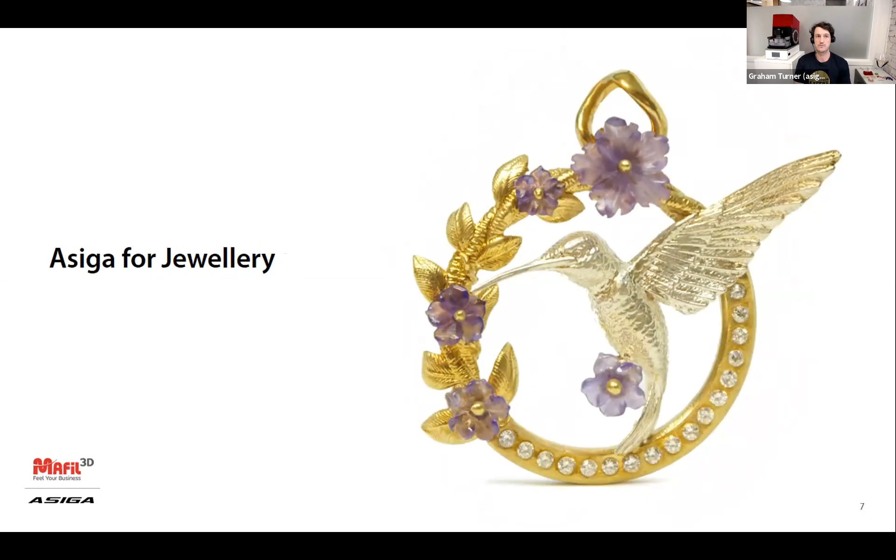So we develop 3D printers primarily for additive manufacturing of end-use components. The industries that we are classified as one of the market leaders in are audiology, where they 3D print hearing aids or audio appliances, jewelry manufacturing - all of our systems are high definition and suitable for manufacturing jewelry - and we offer a superior level of accuracy and precision for dental applications, for restorative, orthodontic and prosthetic dentistry. Also more recently, with our larger Pro 4K system, we've attracted interest from general additive manufacturing industries.

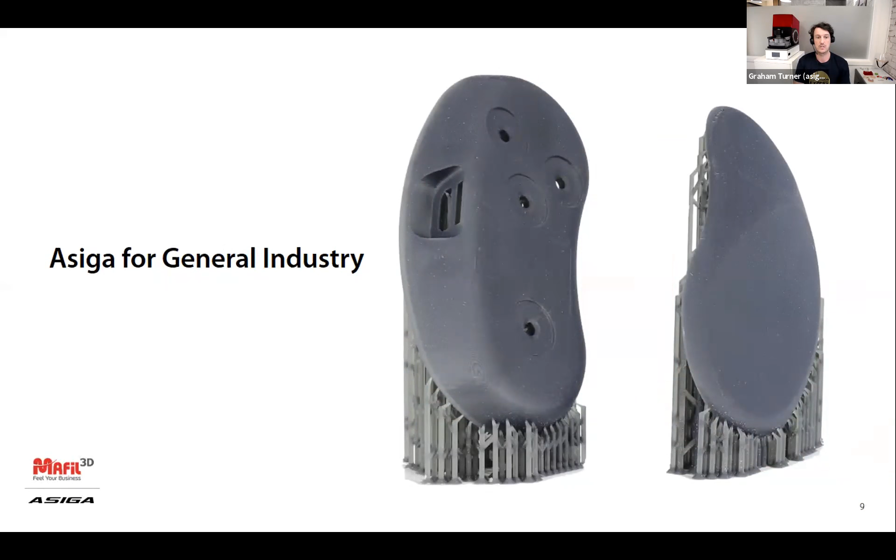And it will do this for every layer. The layer thickness you can print on any Asiga system is arbitrary, so you can choose to print from 1 micron layers through to 200, 300 micron layers, and that all depends on the application. This, for example, is a jewelry manufacturing example, so typically 10 or 25 microns is fairly typical.

Now, the reason we opted for DLP technology back when we began in 2007 was for 3 key reasons. One is that DLP offers a very fast production process, so we're exposing everything in that layer in one exposure.

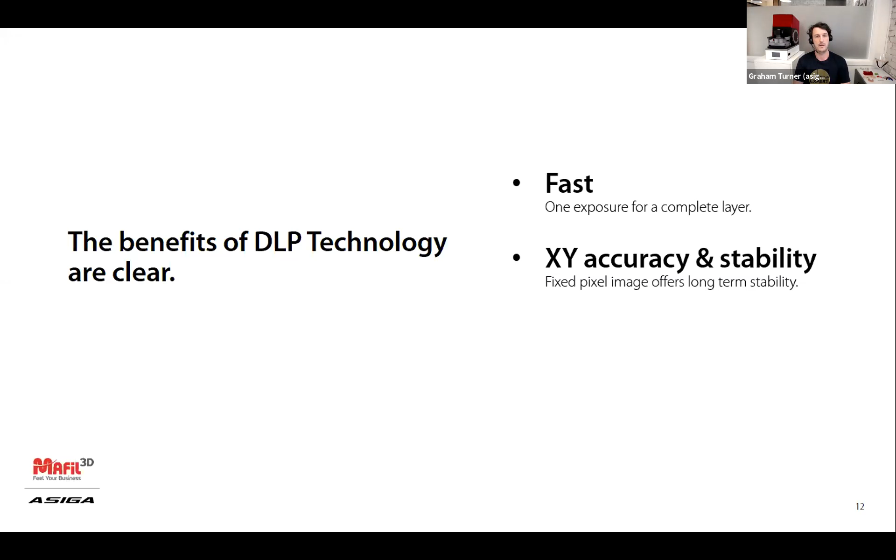Long term, our systems go into direct manufacturing environments specifically, and our largest market is medical manufacturing, for audiology and for dental applications. So long-term stability is critical, and making sure we can achieve that repeatability from print to print is really important. The XY stability on a DLP system is maintained long term. The pixels refer to a mirror on the DLP chip. Those don't move in X and Y, they basically open and close to let light through or block light. So we get good long-term stability on a DLP.

And we've got a wide range of LED options available. By LED options, I'm referring to wavelength of LED. So we have the ability to go into the deeper UV spectrum to process some really innovative new chemistries that are coming out all the time from many different material manufacturers. We find that in the deeper UV spectrum, materials cure much faster. You get a much more accurate, more defined print and much less light overcure.

So the secret to 3D printing accurately is really quite simple. We're producing parts layer upon layer to form an object, so the key really is to form those layers accurately. If you can't form layers accurately, both in X and Y and Z, then you will never be able to produce an accurate component.

I think every 3D printer on the market has the capability of producing an accurate component. There's many different technologies, and those technologies serve a purpose for different types or different applications, different industries. We specialize in the high definition, high accuracy, and precision industries. For us to maintain that accuracy across all of our customers globally, our systems need to perform on a repeatable level. But the key is that those layers are formed accurately. If you can't ensure that those layers throughout an object are formed to the correct size and thickness, you will never achieve a repeatable, accurate output.

So we achieve our accurate layer formation via a number of technologies, which we refer to as process monitoring technologies. The number one technology in this list is our smart positioning system technology, where we not only drive our build platform down to a position, we detect that it's made and reached that position. So we detect for material flow and printer deflection. As we're bringing a build platform down into a liquid resin, a liquid photopolymer that has a viscosity similar, in some instances, to like a yogurt, there's a lot of force required to get that platform down to position, and as a consequence, there's a lot of deflection that occurs on the printer. So our smart positioning system detects that deflection and also detects material flow.

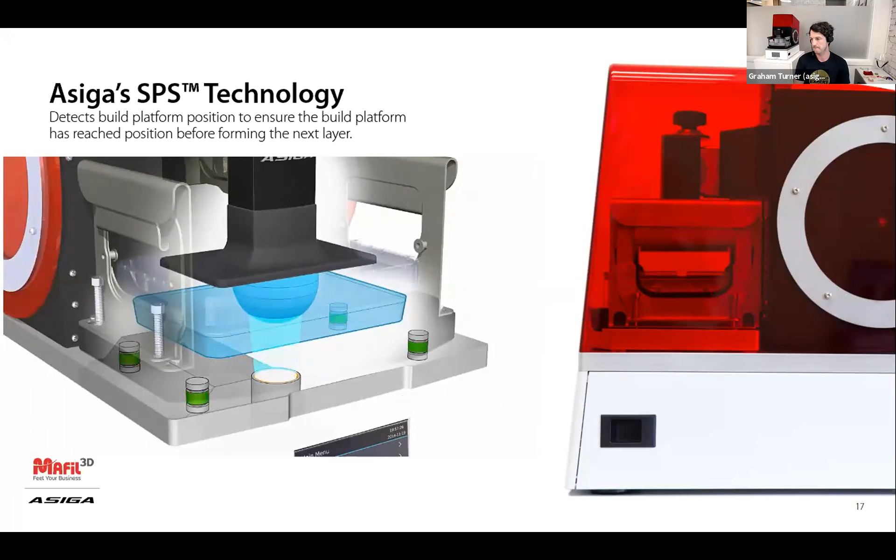So alongside this, build platform positioning is one thing. That's an incredibly important factor in layering.

The second feature we have in all of our systems is an internal radiometer. We're projecting light images onto a light sensitive material, so the intensity of that LED or light source is critical to know how long to cure that material for. We have an internal radiometer actively reading the LED power, and we automatically adjust cure times based on actual LED power. So over time, when that LED reduces in power, we will automatically increase curing time.

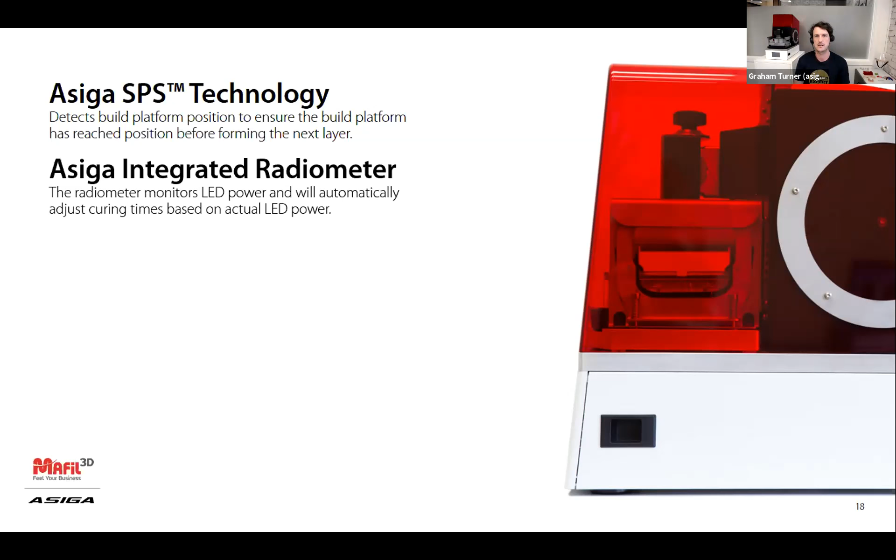Alongside that, we've got a range of LED options. We really focus in the professional, medical market on our deeper UV wavelengths. We've also got the opportunity to produce printers at 405 nanometers. So we've got 365, 385, and 405 nanometers. In the deeper UV, you get much faster curing, so you don't need to cure for as long, which minimizes the light bleed into the material.

Also at that wavelength, we have the ability to produce water clear parts, and they're used widely across the audiology sector and dental sector, where they have certain appliances that need to be water clear and stable.

We use very small pixels, down to 27 microns, on our Max X27 system.

We also accommodate all the unique behaviors of materials when they're being cured. They all behave slightly differently, whether light will bleed through the material at a different rate, whether some shrink more than others, or some materials aren't as strong while they're being printed. So we accommodate all of those material curing factors within our curing profiles.

Ultimately, the printers need to be robust, solid and rigid. Without a rigid construction, the systems will struggle to rebound, so they'll struggle to get back into position after that layer is formed. As they come down to approach, if the printer isn't rigid enough, it will never quite reach position. That's why many systems on the market today have varying results, especially DLP or SLA systems that use an upside down approach like ours.

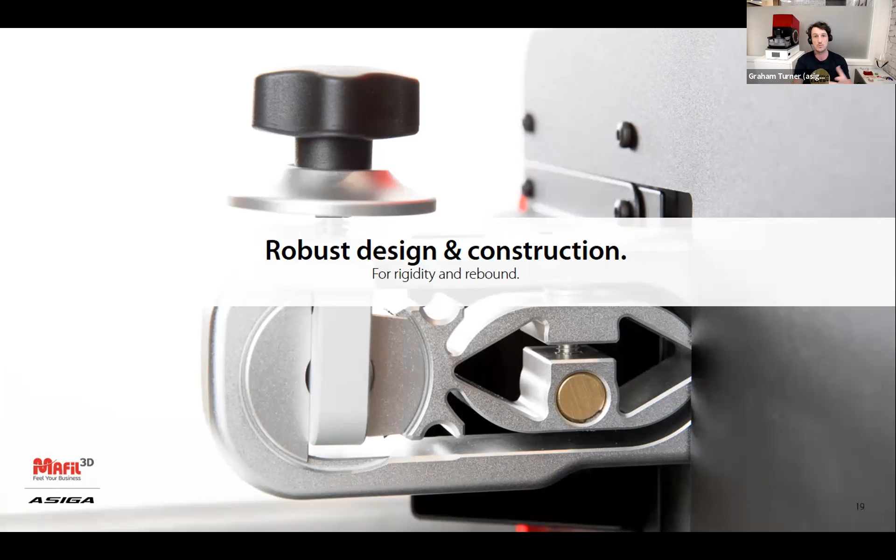We also have a unique mode on our Pro 4K, called 4K mode. This uses a pixel shifting technology, technically called wobulation, where we nudge the DLP chip slightly inside the projector to overlap pixels and achieve much higher definition. So we reduce the native pixel size down significantly.

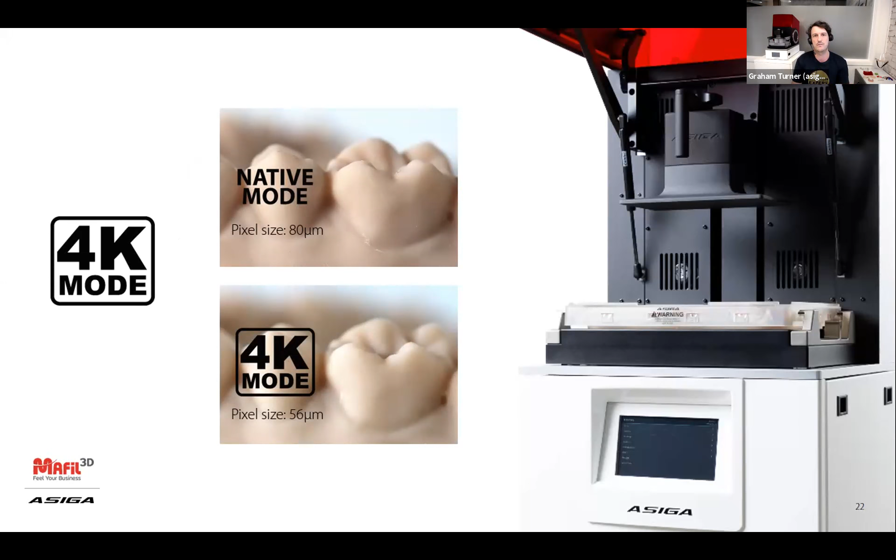On the Pro 4K80, this is an example showing an object printed in its native mode versus 4K mode. The native mode is an 80 micron pixel size, while in 4K mode it's a 56 micron pixel. You can see from the surface finish that the parts are noticeably different, you don't have that digitization on the part surface. So all of our Pro 4K systems are dispatched with 4K mode as standard.

As far as 3D printing goes, I think we're very happy with the engineering on our systems. Asiga, since the beginning, has always had an engineering focus, and we're still very much an engineering company at our core. But we know that materials unlock applications in additive manufacturing.

And we've seen that growth in some industries significantly in such a short period of time. Specifically, if we look at the dental sector, that industry has grown tremendously over the past 3 years, just through the release of new dental materials for many different dental applications.

So the way that we keep our end users up to date is to build optimized curing profiles with all the leading material manufacturers. This is across dentistry, audiology, jewelry manufacturing, and now more of a focus for Asiga is in general additive manufacturing.

And you're lucky to have somebody today from BASF to talk about their materials. It's great to see these big polymer manufacturers really focusing in on additive manufacturing and developing some really quite impressive photopolymers.

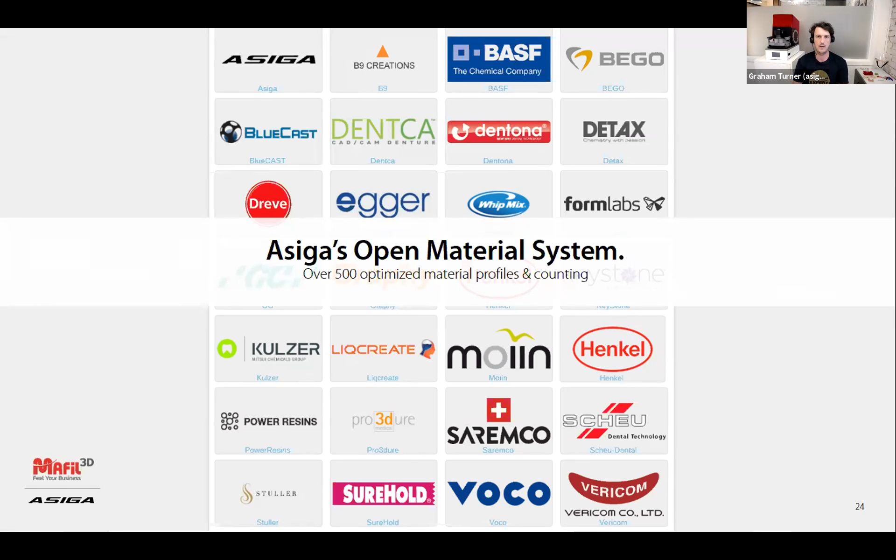And this is a snapshot of our material library, which is growing weekly at the moment. It's staggering to see the interest and development happening across many different industries, specifically around 3D printing polymers.

So I'm going to start with a relationship that we have with Henkel, BASF. I've got some slides after this. With Henkel, the Henkel Loctite brand have developed quite a number of different materials for many different applications. I'm just going to run through some of them with you now. These are compatible with Asiga 3D printers.

So they've got a range of materials from their 3843, which is a high toughness material. They've got a high temperature material which is their 3860 for temperatures up to 220 Celsius. They've got very good elastomeric materials. And I'm going to keep going through these.

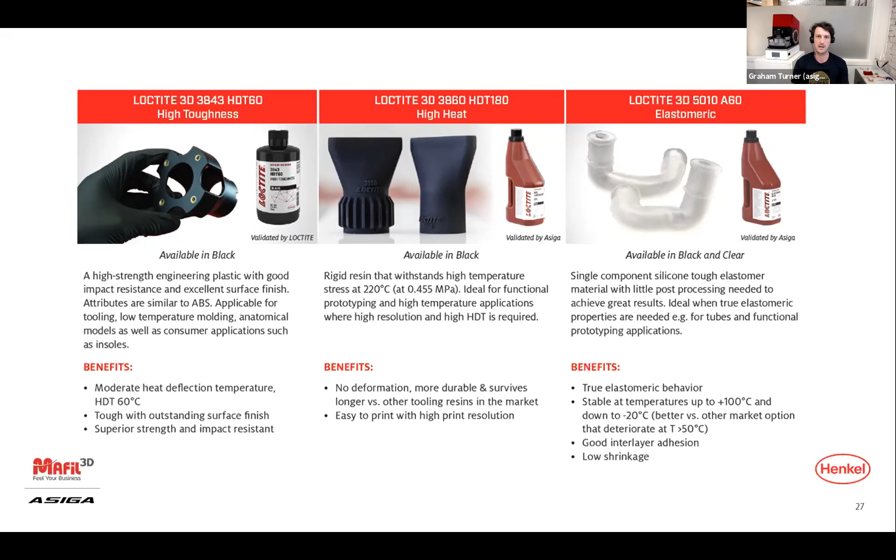These materials, when we started to develop curing profiles, we work directly with Henkel, we work directly with BASF. When we start working with these polymer manufacturers, it's really quite clear that they have a noticeable difference to what we have been familiar with since we began in 2007. There's been a real shift in the mechanical properties available now, especially for our technology, especially for DLP.

Continuing the Henkel range, there's another high impact material in 3172. There's a tough material for dies for injection molding inserts. Asiga also has a material called Fusion Grey, which we've got documented on our website, where we've used that for injection molding inserts. There's another elastomeric material here. And then they've got a general purpose material, a highly accurate material, and an ultra clear material.

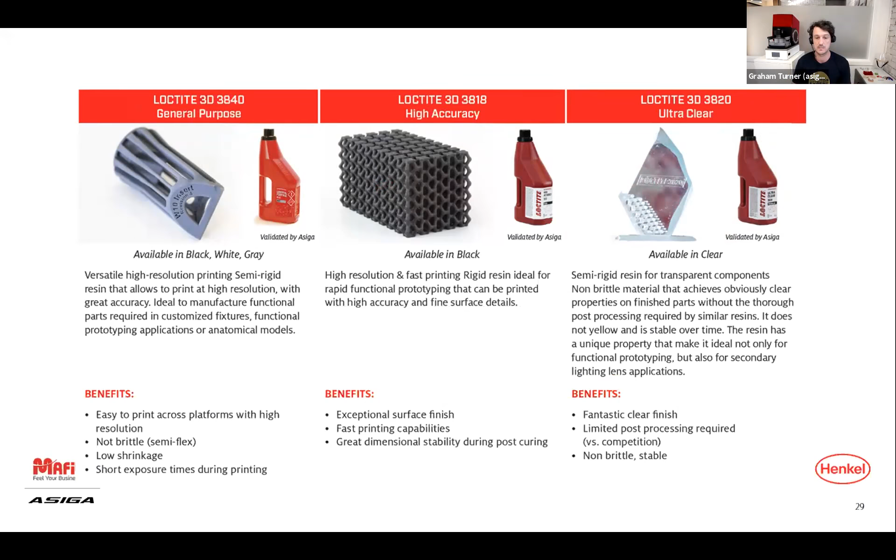It also requires some special processing to begin printing. The material at room temperature is solid. It needs to be warmed to a temperature and then placed in the printer. And then our onboard heating system on all the Asiga 3D printers keeps that temperature at the designated temperature to continue and complete that print.

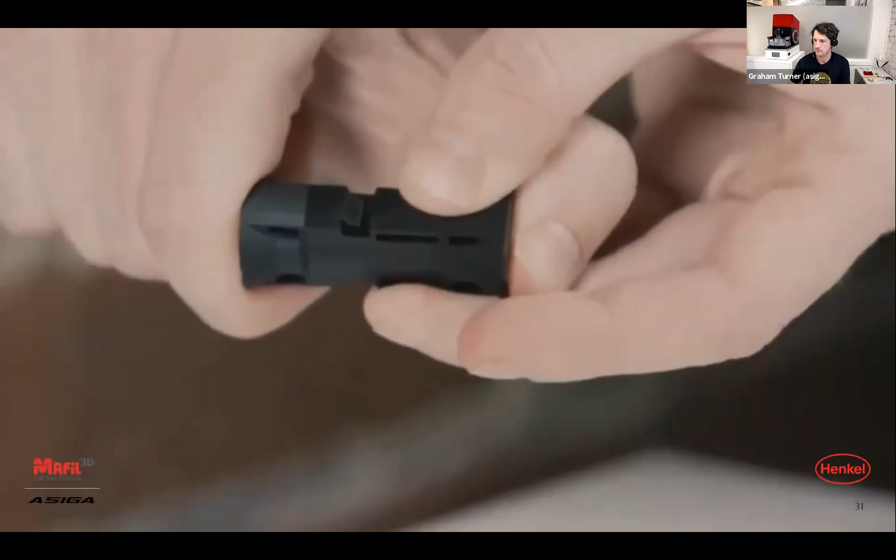Resistance of this incredible material enables industries like aerospace, automotive, and mass transportation for the first time to produce end-use parts with additive manufacturing. So we expect to see more of this material, but this is just a brief summary of how this is processed on an Asiga 3D printer.

So first of all, we need to heat. This is at our application center in Germany. As you can see in the build tray, the material requires heat to liquefy, as it's solid at room temperature. Once it's in its liquid state, it's ready for 3D printing, and this is a full build platform of electrical connectors from a large electrical connector manufacturer in Europe, printed on our Pro 4K 80 UV system.

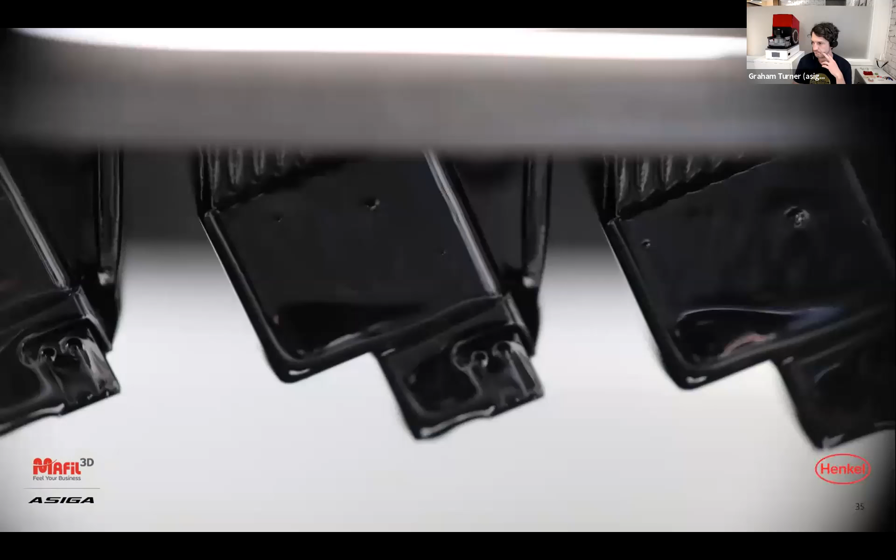From a production perspective, this is our largest format 3D printer, achieving an accuracy suitable for restorative dental applications. So this isn't a large format system with low resolution, it offers an accuracy and definition that fits with dental applications. So these are just some images showing these connectors and the final product there.

Then on to BASF. I can see I've got about a minute left of my presentation. BASF again, they really are breaking ground when we talk about material characteristics, mechanical properties. They really are leading the way. They have a range of high temperature, high stiffness materials in the Ultracur3D RG series.

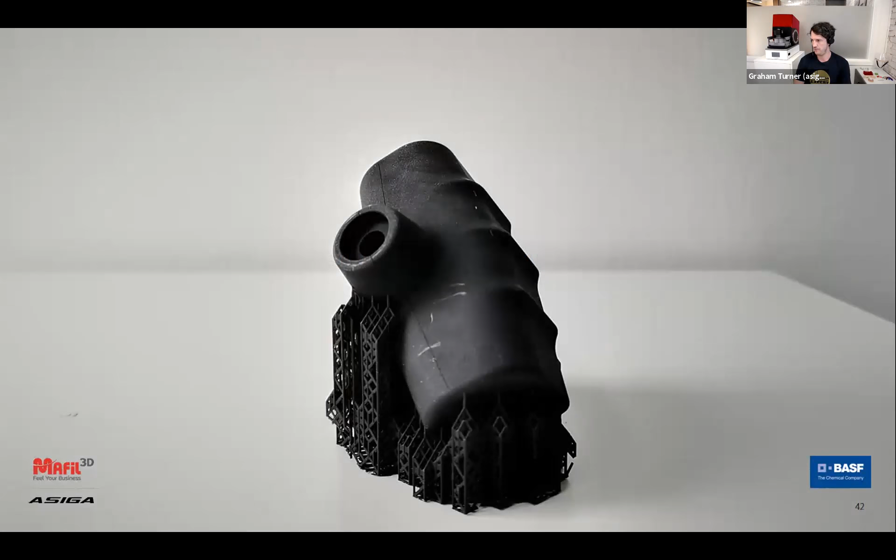And we've got the curing profiles for those in our material library, and also the ST series. And these are just a couple of components printed in their ST45 black. These have been printed on our Pro 4K 80 UV again, but they're available, you can print these materials on any Asiga 3D printer.

And then when we talk about definition and accuracy, the resolution of our systems can go really down to tiny pixel sizes, and that's when microfluidics come into play. This is a device that was developed by MIT in the US. It was a customized 3D printed unit to test drugs on tumor tissue, to accelerate validating drugs for particular cancer patients. So this is the unit that was printed, where you can see a microfluidic channel through.

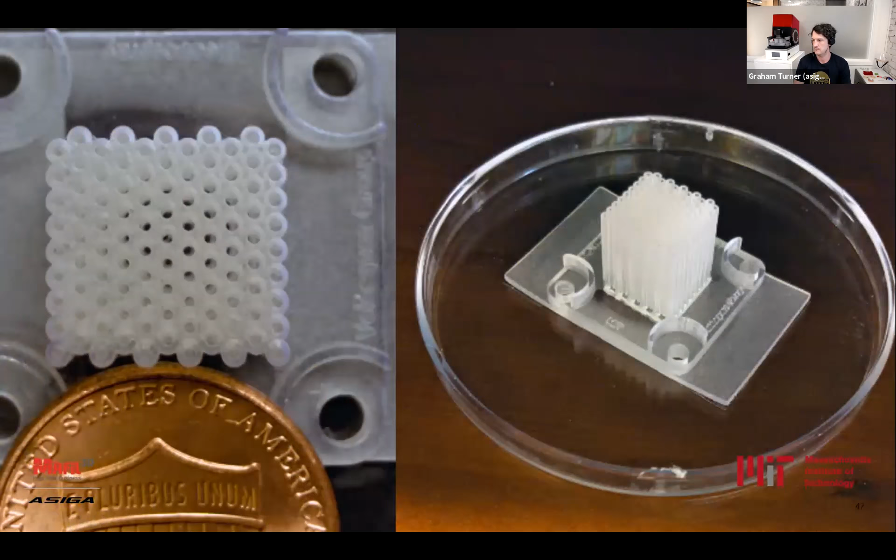Now, just a brief summary. I've nearly finished, to hand over to the next presenter, but we've got three main products in our lineup. We've got the Max, which we recommend for dentistry, audiology, and general additive manufacturing.

It's got a build size which will come up in the next slide. We've got the Max X, which is our highest definition system. That's quite a small build area, but it's suited for jewelry manufacturing, microfluidics, and there's lots of leading laboratories and research centers around the world using the Max X.

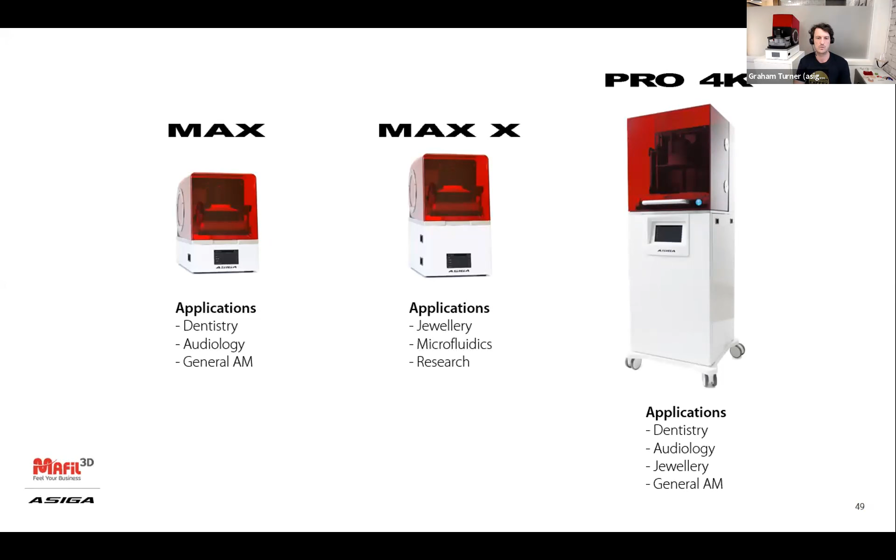And then we've got our large format floor standing Pro 4K system, which is for dentistry, audiology, jewelry manufacturing. There's a mode for jewelry manufacturing and also general additive manufacturing.

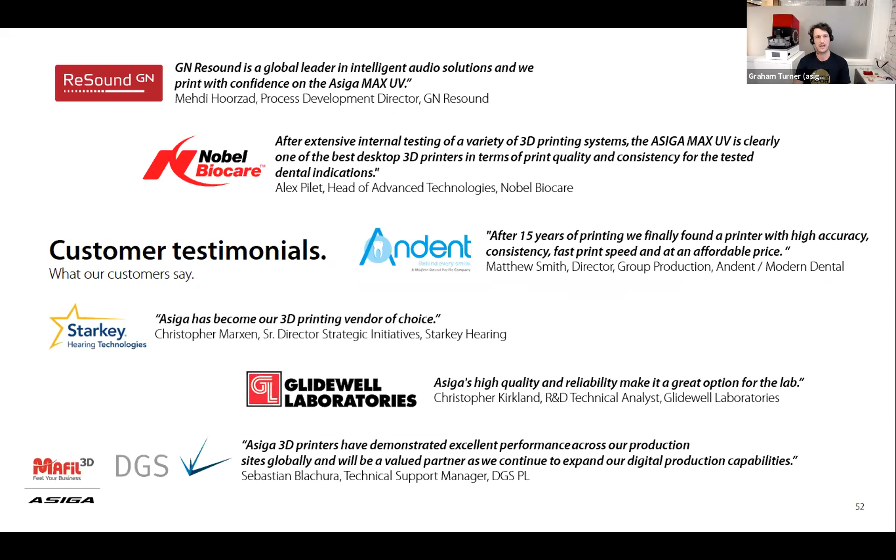We're really happy that our development over the years has been recognized by some of the leading manufacturers, across these testimonials that are popping up here across audiology and dentistry. They're some of the leading laboratories, so they rely on Asiga and the performance of Asiga to deliver the accuracy and the repeatability that they need in their production process. And that concludes my presentation.

Graham, thank you very much. It was very, very interesting. You have a few questions in the Q&A if you want to answer. Can you see the questions on the top of the screen? So yeah, so I'll just

Work through these. So the idea of continuous 3D printing is an attractive proposition. What you find with continuous 3D printing is that you need a dead zone within the material to allow for that, and typically the accuracy you can achieve with that is reduced. So our primary focus whenever we look at our 3D printing technologies and the 3D printers we deliver to our users globally is that they offer an accuracy suitable for those applications that we target. That was in some of my earlier slides.

But alongside that, which is incredibly important in a production environment, is the repeatability. That's where all of our process monitoring technologies come into play. And then the speed of the system is the third focus point on our list. I don't think right now continuous 3D printing can actually offer the accuracy and repeatability that our systems can, although Asiga 3D printers are far from slow. They're fast, not far behind a continuous 3D printer. But when you look at the accuracy and repeatability of our systems, they sit higher up the chain.

Just a reminder, if you're not familiar with our technology, I'll share just 2 slides to explain how multi-jet fusion works, very shortly. We can divide our process into 4 steps. In step 1, we lay a thin layer of powder on a build platform, about 80 microns. In step 2, we apply the agents, which are the liquids we use for fusing. In an additional step, we deliver energy with infrared lamps. Where we apply the agents, the material melts, and this is how we create solid parts inside the build platform.

I'm talking about powder bed fusing technology, so there's no need to print or build any supportive structures, because the powder itself works as a supportive material. So there's no extra or additional cost for supportive structures.

If we take a look at our portfolio, what we have available right now, we actually have 3 types or branches of machines. On the very left side, you can see the Jet Fusion 300 and 500 series. It's a great machine for prototyping, an all-in-one solution, and we have 2 types of printers: the 540 and 580. The difference is that the 540 prints in monochrome mode, while the 580 is able to print in full color. If you look at the picture in the middle, you can see the Jet Fusion 4200 system, which was actually the very first machine we introduced back in 2016.

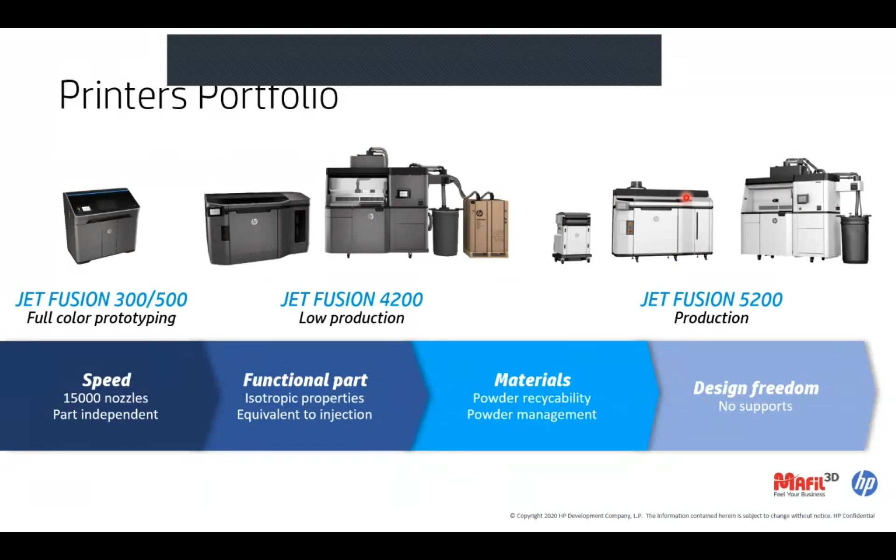The scope of this presentation is to introduce you a little bit about our materials, and about our latest materials, because we have an open material platform, which means we are working with external partners like BASF and Lubrizol. These are companies, so it's not only us developing the materials, but we have a wider cooperation at a worldwide level.

If we look at the 5200 machine and our material portfolio, our basic materials are polyamides. We have PA12, PA12 glass beads, and PA11. We also have an elastomeric material, TPU, which was developed in cooperation with BASF. And our latest material, which I'll talk about later in the presentation, is polypropylene, also developed by BASF. Just for comparison, let me share the material portfolio for the 4200 machines.

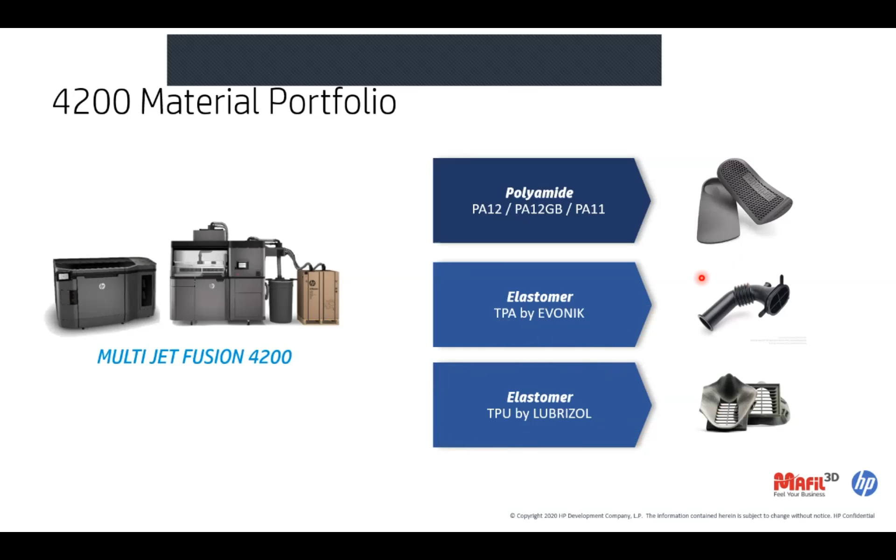We also have polyamides, so the family of polyamides is the same for both platforms: PA12, PA12 glass beads, and PA11. For the 4200 platform, we have two elastomeric materials: TPA made by Evonik, and TPU made by Lubrizol. The material I will talk about today is TPA made by Evonik.

But let's start with the 5200 platform and our latest polypropylene. So, well, why did we actually choose the polypropylene?

Just for your information, the others in the row are ABS, HDPE, and PS. These are the other most common plastics in the industry, but polypropylene is actually the biggest one. So it makes perfect sense for us to focus on polypropylene, to enable applications which were not suitable for our PA family plastics.

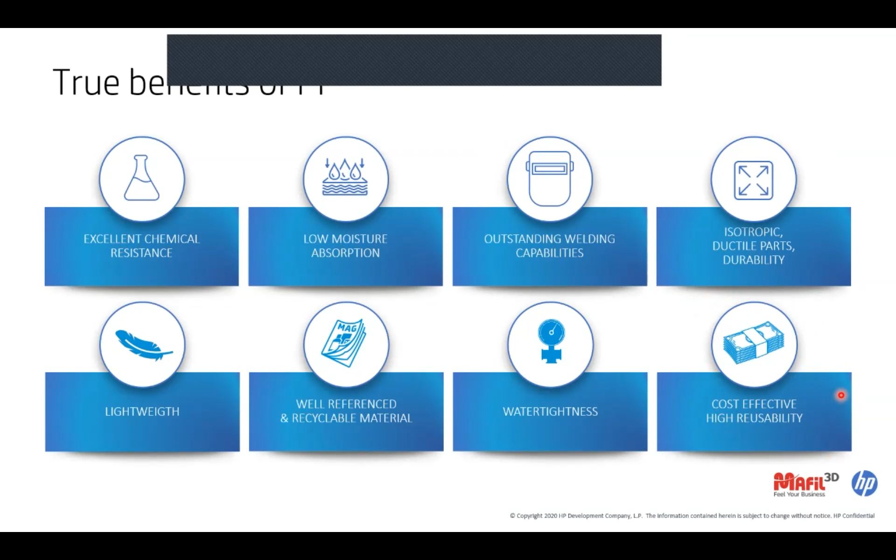Another thing I would mention is cost-effectiveness and high reusability. These two properties are kind of connected. Firstly, the cost of polypropylene—it is the cheapest material in our portfolio, and it is the cheapest material in general when talking about injection molding and available plastics. That's why we took the effort to focus on polypropylene.

When talking about high reusability, our polypropylene is a low reactivity polypropylene. That means, in theory, we can use 100% recycled powder for building parts. Actually, it's not quite possible because you have to add some new material to the system to produce the waste material. But theoretically, we can work with 100% reused waste powder.

This also affects the final cost per part. So you have a cheap material as an input, and you can use 100% waste material, which affects the final cost per part in a major way.

Here are some mechanical performance characteristics for our polypropylene. It's now available only on the 5200 printer series. The values I'm sharing are for the balanced print mode, meaning one pass. You can see some of the values on the table.

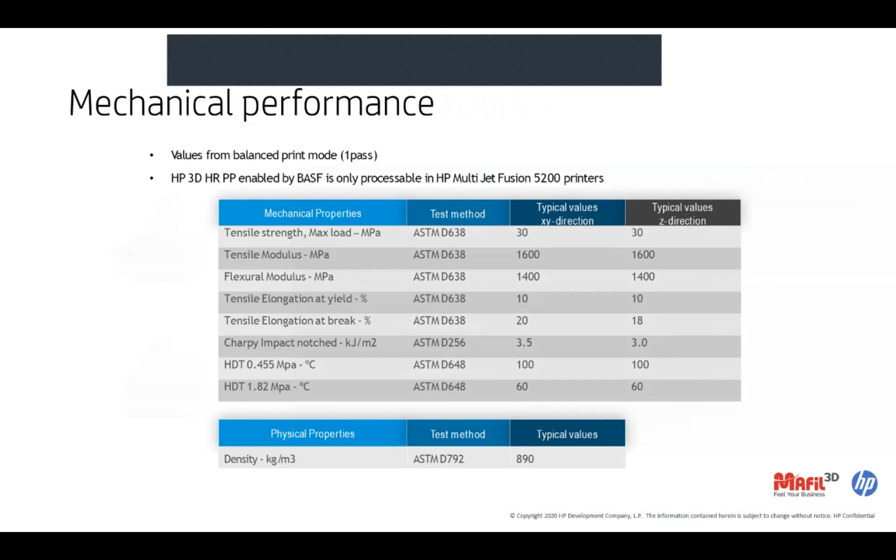Let's continue. I was also talking about the outstanding weldability capabilities. We tested a lot of different methods, from ultrasonics to vibration. These are very common technologies in industrial use, and I have a lot of experience with them. Talking about ultrasonics, it's probably the most used technology for joining plastic parts, and we tested all of the different methods together with Extol.

Okay, so let me share a short video.

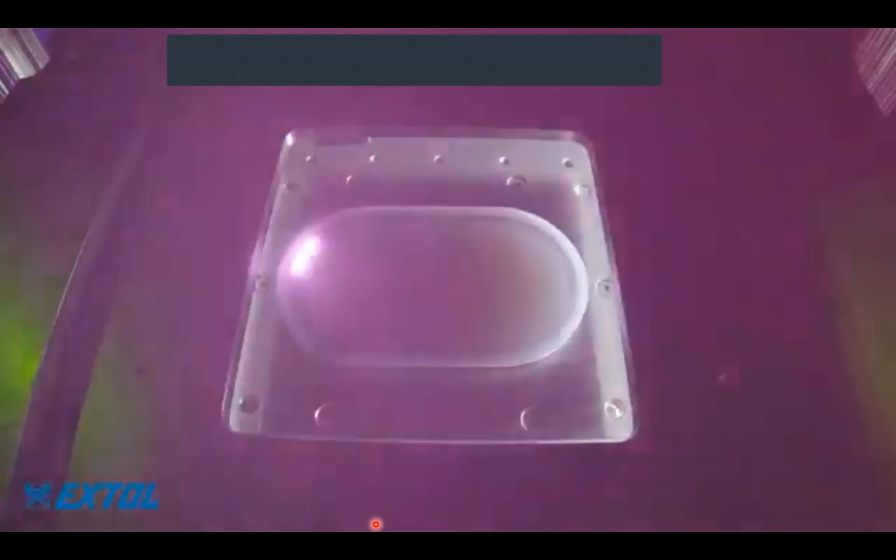So there is no sound playing. I don't know why, but actually it's just the music behind, so you didn't miss any kind of information over there.

What I just showed was the example of the laser welding. So you can see that we welded transparent material to the base of the polypropylene, which is kind of interesting.

When we talk about the possible applications, it comes to the superior properties of the polypropylene. I was talking about the great chemical resistance because PP can withstand exposure to many different chemicals where PAs do not work, like acids and some solvents. I also mentioned the hydrolysis resistance - basically no water intake by the material, so no change of mechanical properties happens. So based on these characteristics...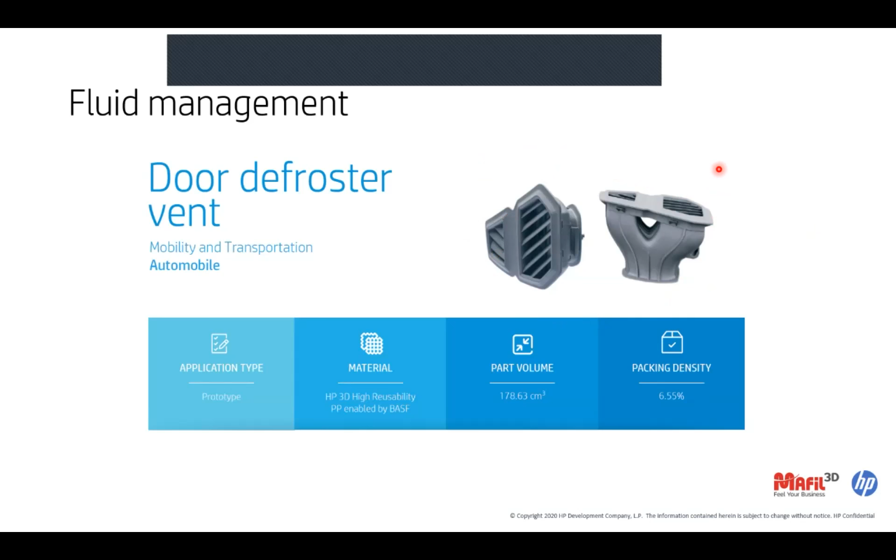Another material I would like to mention today is the TPA. The TPA was developed for the 4200 system, so at the moment it is not available for the 5200 system. For the 5200 we have the TPU made by BASF. So for the 4200 we have this new TPA.

So what it actually brings - TPA is a flexible material, also lightweight when you compare it with the TPU we have also available for the 4200 system. It's an elastomeric material with high part uniformity. I will show you what that exactly means on the next slide. I would pinpoint the high level of detail and color uniformity, which is a big step forward when comparing with the TPUs. And it's an easy to process material.

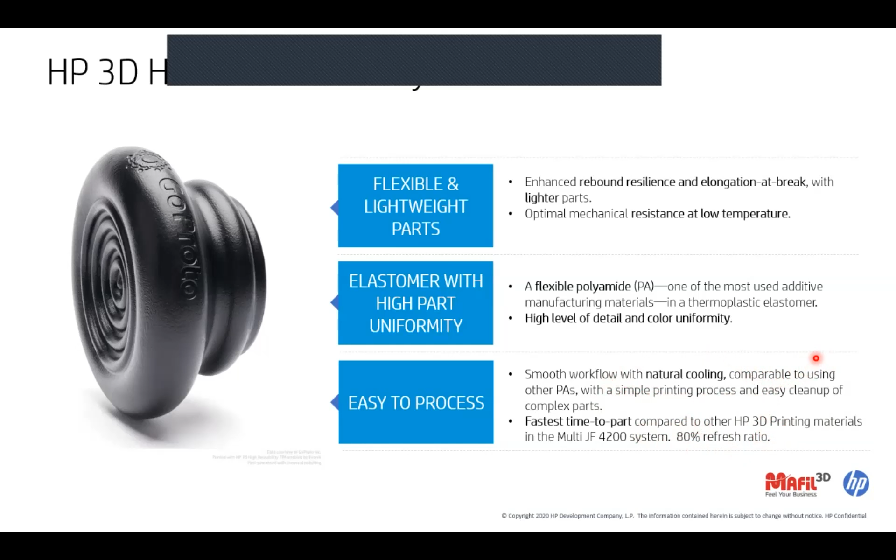When working with the TPA, the printing time is faster than on a TPU. You can use our standard 20-80% refresh ratio, and natural cooling is available for the TPA. That means there is no extra or additional step in the process, and you can let the material cool down inside the cooling units or inside the build units.

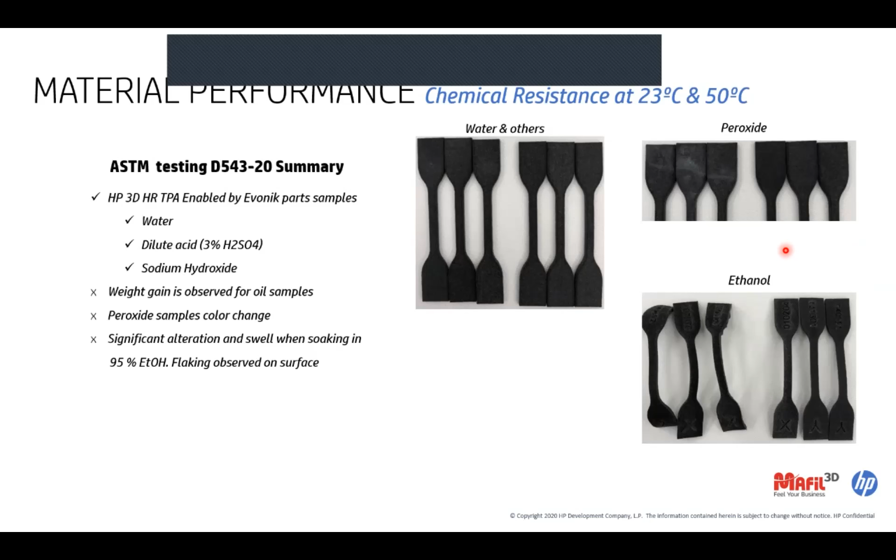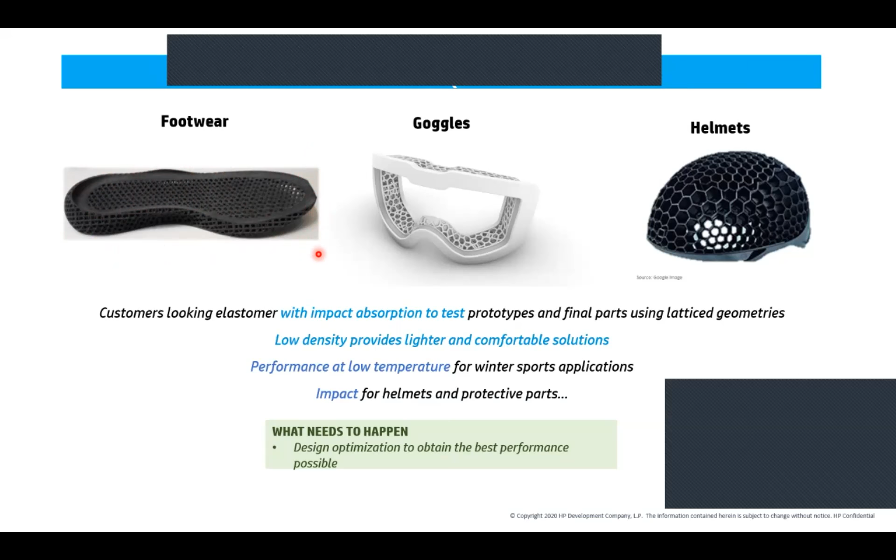With our approach, we design complex lattices, and just by modifying these lattices in different areas, you can define stiffness. This is the way to go, at least from our standpoint. Our vision for the future of footwear might be totally customized midsoles for all different customers, because everyone is different — everyone walks a different way and has different habits. We are making big steps forward to bring this application to real customers.

Another application from sports equipment I would mention are helmets — you can see some honeycomb structure here. When talking about helmets, I'm not talking about the outer shell, which has to be durable, tough and impact resistant, but the inner parts — not only for sports helmets, but also military or working protective gear. We work with TPA because of its shock absorption properties.

Just one more application in the middle — goggles for skiing or snowboarding. It's flexible material and works perfectly in temperatures below zero. This is another thing I'd like to mention: our TPA has a wide temperature range of usage, working even at low temperatures where other materials could become fragile.

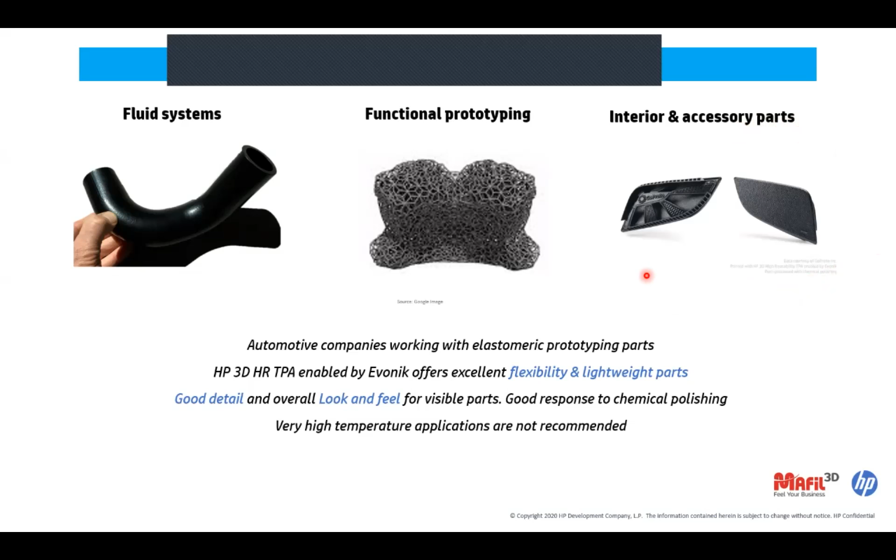All right, so that was all I prepared today. Hopefully you like it. If you have any questions, go ahead.

So up next, I will explain a little bit about these polymers and what these are. Basically all these polymers, as a starting point, can withstand high operating temperatures and wide temperature deviations.

Mechanical properties can be up to 3 times higher compared to, for example, PA11 or PA12. Chemical resistance is extremely good, so these can withstand most harsh chemicals and solvents. Almost all of these polymers have flame resistance, and to summarize, these materials can be used in applications where engineering polymers don't work or metal is not the optimal solution.

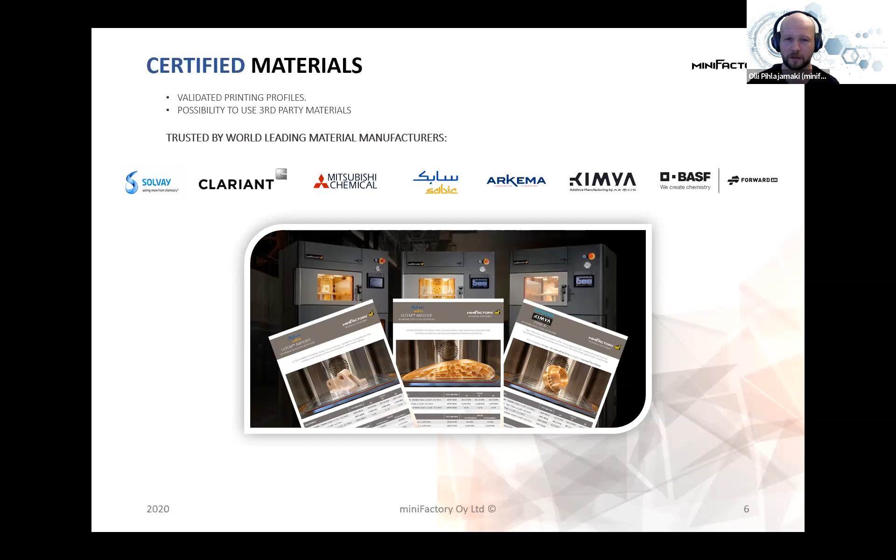Our printer is an open source system, which means the customer can use a chosen supplier for these polymers. The reason for this is that with an open material system, the customer can save up to 30 to 50% of material cost compared to locked systems. And we are cooperating with world-leading material manufacturers, so we can ensure the highest quality materials work in our system.

Next, I will show you a couple of examples, use cases from different industries. In aerospace, one of the most known 3D printable materials is Ultem 9085. This material is certified for aircraft components, and when we look at commercial airplanes, most of the interior parts, panels, and these kinds of plastic parts are based on this polymer. The material is FST compliant with an OSU rating of 55 to 55, and naturally it's a flame resistant material.

This material can also be used in railway vehicles based on the EN 45545 standard, so the material is certified for train cabins as well. And of course, when we are talking about plastic parts, we are not manufacturing any critical parts. So in the airplane or aerospace industry, different covers, panels, brackets, and things like that can easily be printed.

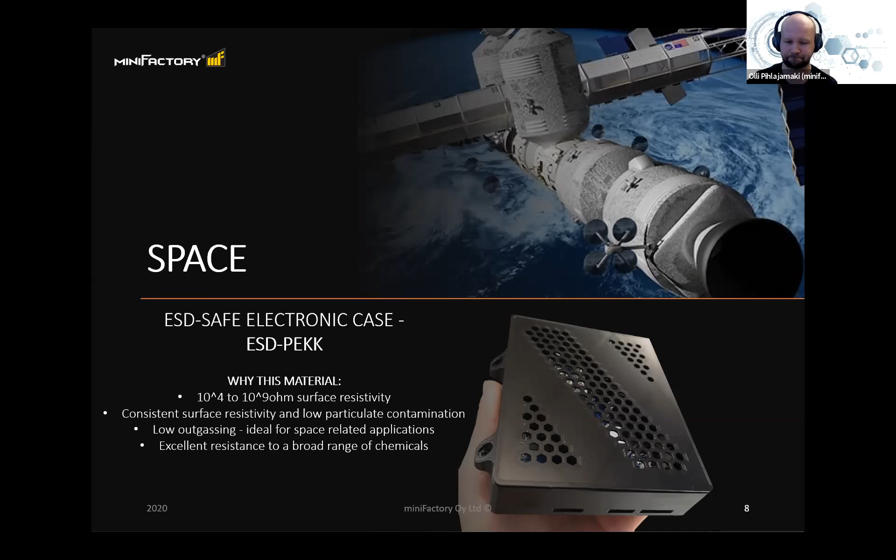Electric vehicles, a fast growing industry at all levels — we can see more and more electric vehicles. When we talk about electric vehicles, there's a demand for a lot of parts to cover and insulate these electric components. For this purpose, we have an interesting material called XTEM. The material is thermoplastic polyimide, and it can withstand up to 240-degree temperatures, with really high electrical insulation properties. So it's a perfect choice for different electrical applications, especially in electric vehicles.

Motorsports — Finland is a promised land of motorsports, rally and Formula. We have a really nice example here in Finland: former WRC driver Jari-Matti Latvala is nowadays building rally cars. He has his own garage, and he's printing a lot of parts for his historic rally cars. The need for these kinds of special parts is there since these cars can be up to 20 to 30 years old, so there are no spare parts available anymore. Now they can print, for example, turbo intake pipes and different underhood parts for their rally cars.

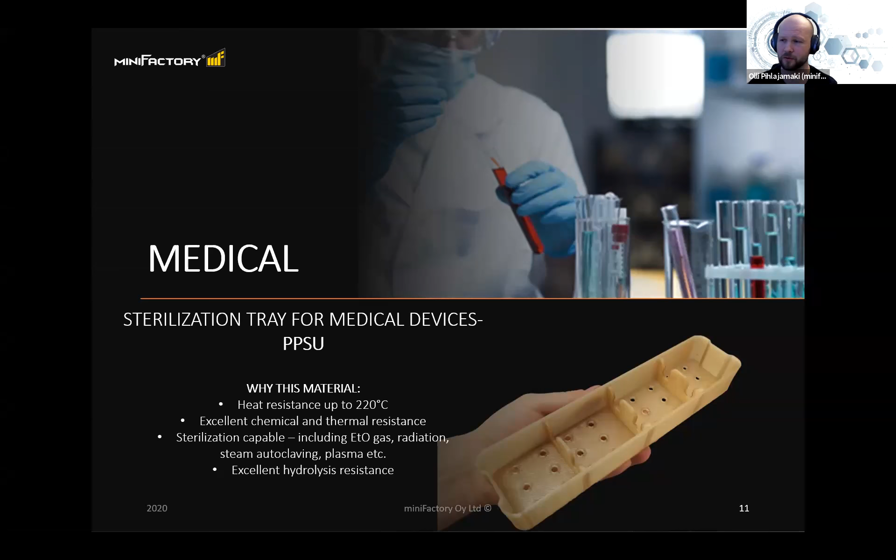One interesting application for the material called ULTEM 1010 is different kinds of composite tooling. Nowadays, a lot of these molds are manufactured of metal, but now, based on the really good mechanical properties and high heat resistance, ULTEM 1010 is widely used in different composite tooling.

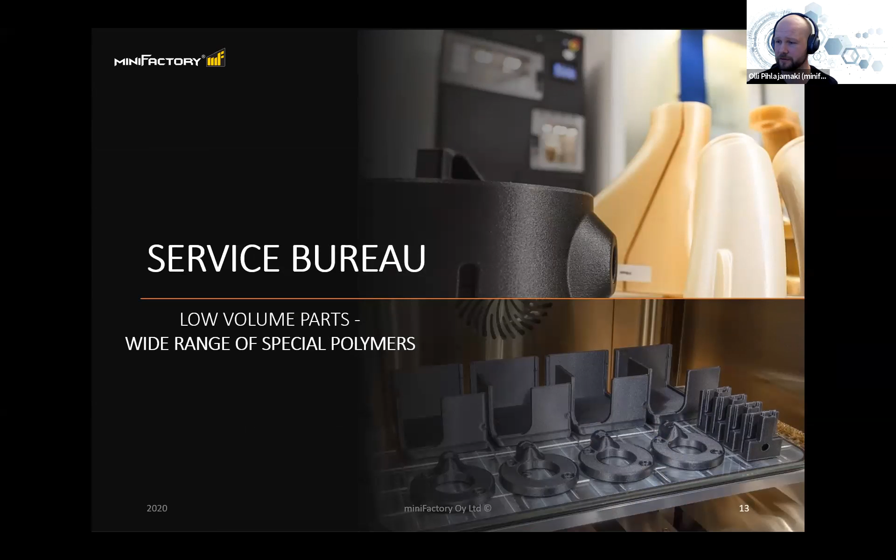Then of course, for the service bureau, when it comes to thermoplastics, miniFactory Ultra has the widest material range available on the market. The reason for that is the chamber temperature - the whole chamber can be heated up to 250 degrees, which allows us to print the most demanding polymers and polymers with the highest glass transition temperatures.

With this heated and controlled temperature, we can control the parts perfectly during the process to avoid all internal stresses and to ensure optimal mechanical properties for printed parts.

I don't want to go too deep into these specifications, but a couple of things to pick up: robustness and repeatability are key in 3D printing. Our printer has AC servo motors and ball screws in all axes, which ensure really high repeatability for printed parts.

We also have a heated filament chamber in the system, which ensures the optimal environment for materials during printing. Without this kind of controlled, heated material station, the printing quality would start to suffer in a critical way after a couple of hours, even though the material would be perfectly pre-dried in advance. These materials absorb moisture quite easily, just like PA materials, so with this integrated feature we can ensure high printing quality even in really long prints.

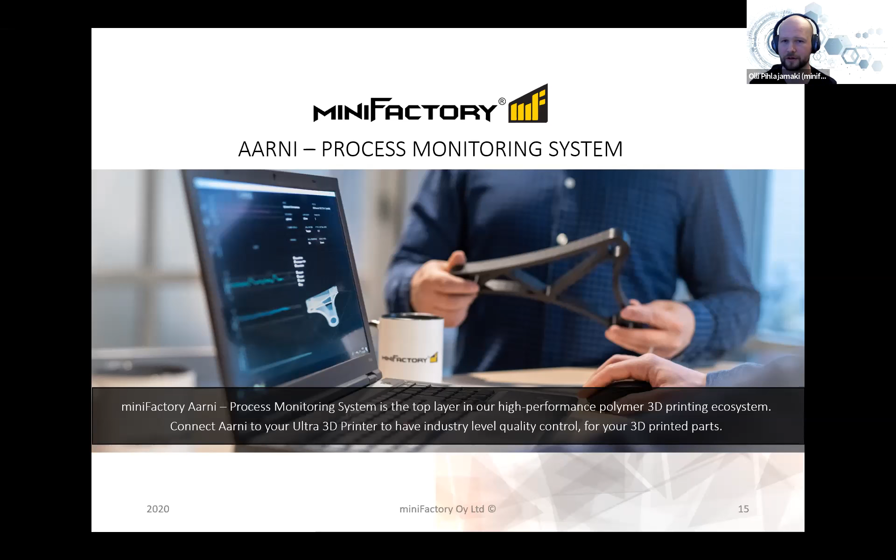How this works: our printer collects data from multiple different sensors during the printing process. When operating with thermoplastics, temperature and constant temperature are of course key to achieving good results. After the print job, our computer software transforms all that data into graphs and a visual 3D rendered picture of the printed part, so we can easily take a deeper look at the printed parts.

We can have line by line, layer by layer visualization of the printed part. In this software, you can go through each line, each layer, and see the exact parameters that occurred during that layer or line. What makes this really easy to use is the visualization the software offers.

If there are deviations in temperatures and the temperatures have crossed the set limits, the software visualizes these deviation sections of the part by different color. So from the color, we can see, for example, that extruder temperature has gone below the set range, and in the software we can see the exact lines where that occurred.

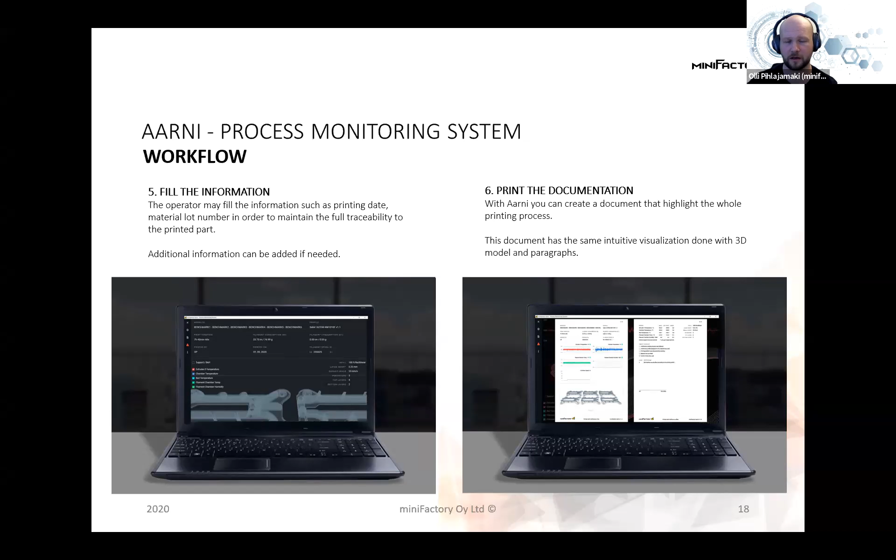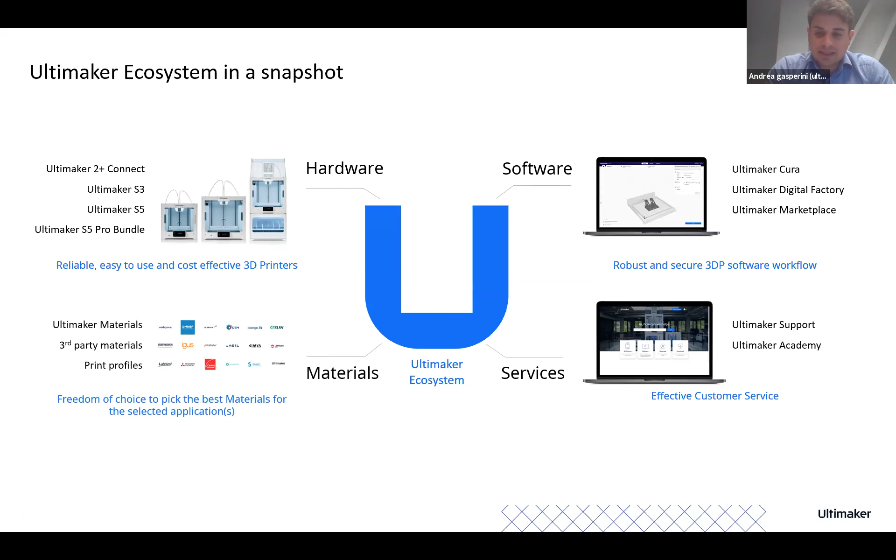Today I think the core of my presentation will be how we leverage the potential of the material ecosystem that we have developed at Ultimaker, with our open filament system and all the types of applications that can actually be produced.

Our open material system, as you might know, is not limited by any restriction in terms of material use, as long as it's 2.85 millimeter filament. All the ones available on the market can be used on Ultimaker. We have at the moment more than 180 materials that have optimized print profiles for all the models of printers we currently have on the market.

And we have established a pretty strong material alliance program where we really work together with material suppliers to leverage at maximum the potential of the material and the processing technology.

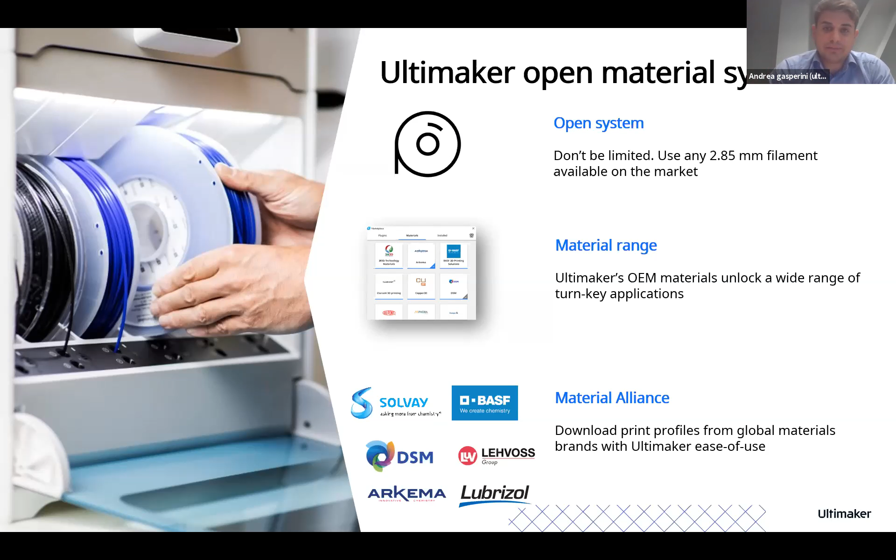Of course, it's very beneficial to have an open system, as long as it's easy to navigate, really easy to understand, and also possible to discriminate between several features of each category of material that we have in our system.

Our system is mainly composed of three categories of material. The first is the Ultimaker materials - really generic types, ranging from commodity to engineering: PLA, ABS, PVA, TPU. All these materials feature an RFID tag, so they are recognized right away by the printers. On the marketplace and in Cura, we have optimized print profiles per material and per color, and detailed documentation of each type of material with technical specifications.

The second pillar of our material ecosystem is the material alliance material. We have around 120 materials at the moment that are mostly functional, so they have a unique functional property compared to the generic Ultimaker material. These are also characterized by optimized print profiles per material, per printer model, and each has clear documentation accessible on the marketplace and on Cura.

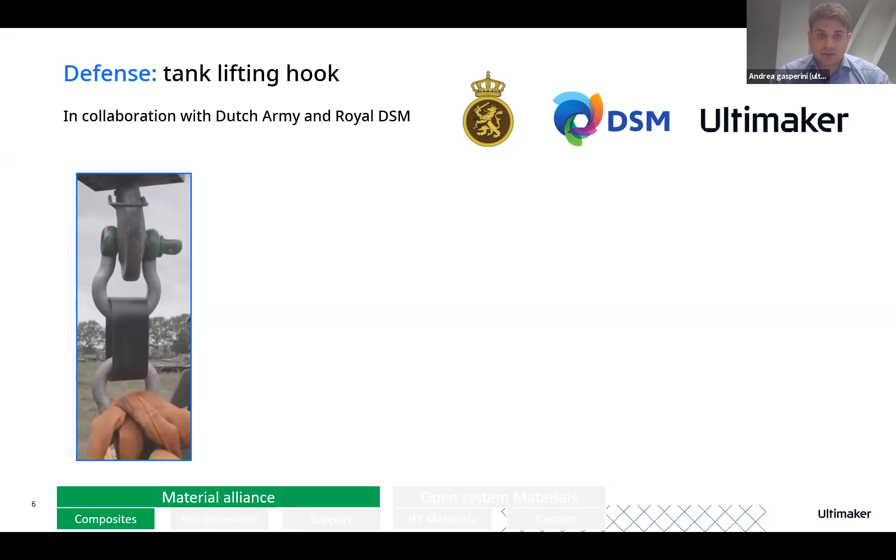Today I want to show you the first use case that we developed in collaboration with the Dutch Army and material manufacturer DSM, using Novamid 1030 CF.

The Army uses additive manufacturing extensively to create parts to deploy in the field. In this case, believe it or not, they used this hook, printed here in our facilities, to lift a tank of a couple of tons 30 centimeters up off the ground.

How was that possible? It's really useful to work closely with material partners to exploit and leverage the full potential of the material they created, and on our side to exploit the maximum potential of the machine to boost mechanical performance.

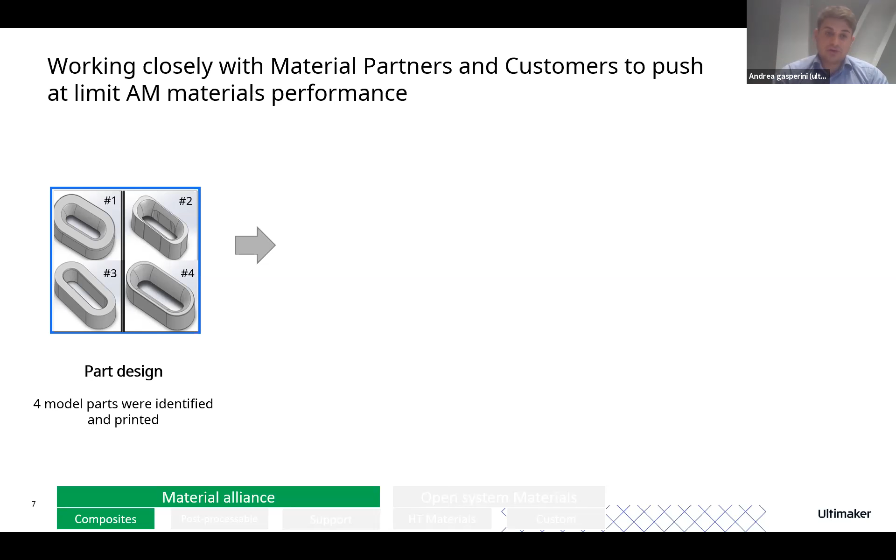So together with DSM we deep-dived into different designs for this hook. We created 4 different models, analyzed with finite element analysis using Digimat software and FEA software, to identify where maximum stress was occurring and the potential failure mode for each model.

We stressed the part in a controlled environment before testing to understand the maximum load each model could withstand, iterating until the best load specific for that tank was achieved.

The second use case is an automotive case, from a racing team here in the Netherlands called Van Amersfoort Racing. It's a clear example of the Ultimaker printer's capability to produce a multi-material product, where a single part has two different materials extruded together.

In this case, the application is a side pod blower. Initially, the solution was a collage of different metal pieces bolted together, homemade, and it wasn't easy to replicate or fit a different car design.

So they wanted to go for an additive manufacturing solution, and we worked closely together to achieve such a complex end product composed of two different materials.

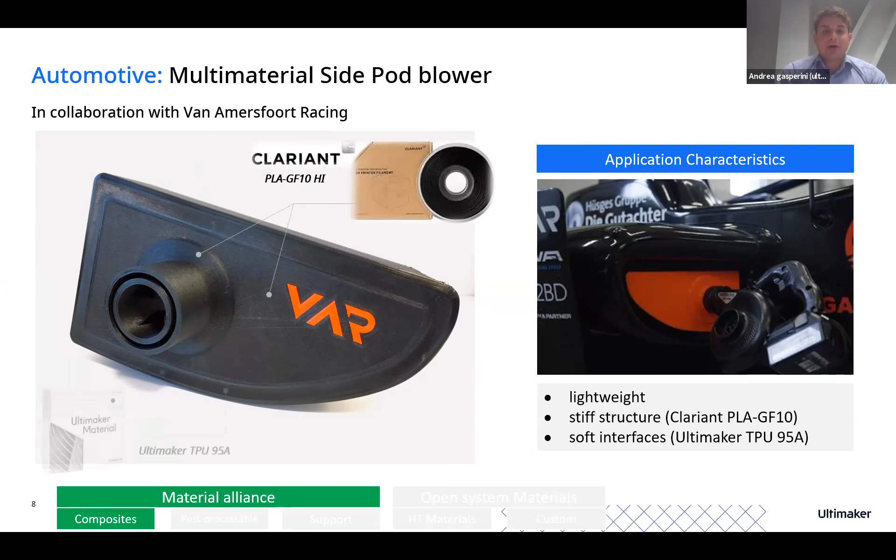The outer part has to fit within the car without scratching it, providing a good cushion effect and sealing well so no air blows outside of the part.

This outer part was produced with our TPU, Ultimaker 95A Shore TPU.

Next I want to step into a second range of materials, also part of our material alliance program, which is post-processable material. Here I'm presenting one solution: stainless steel material coming from BASF, called 316L, a grade of stainless steel normally used in industry.

What we're targeting are small and complex parts featuring large assemblies that are unnecessarily expensive to produce by other means like CNC or metal injection molding. We also want to target the thousands of specialized production and assembly tools used in mechanical workshops, as well as applications usually produced in plastic that have limitations in harsh environment usage.

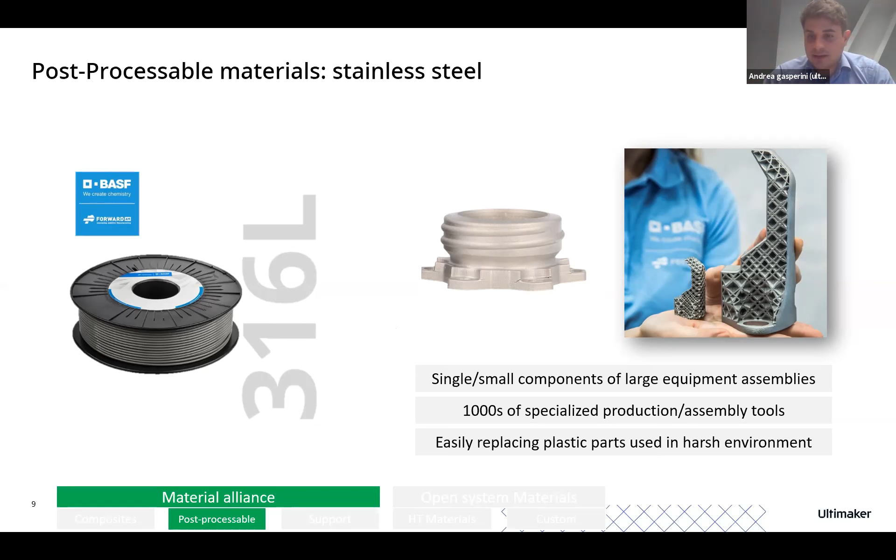But not all parts produced with 316L are ready to use right away. You need two extra steps along the line—debinding and sintering—in order to get the final part.

The good thing about the solution that Ultimaker and BASF are bringing is that we are not forcing anybody to in-source the equipment and knowledge to perform the debinding and sintering. You only have to in-source the 3D printers and the material to create a green part. All the outsourced steps, the debinding and sintering, are actually performed by a service provider that you might find in your region, also available in Israel, and I'll be happy to give you more information about that.

You only have to perform the printing step, which, for example, for a pump impeller would last 5 hours for a total cost of 40 euros. Then you outsource the debinding and sintering steps, which take roughly 2 to 3 weeks to be performed, with a total cost of 24 euros. So you get your final part, a pump impeller that I have here in my hands, for a total cost of 64 euros versus the 1,000 euros you would normally pay for such a part as a spare part.

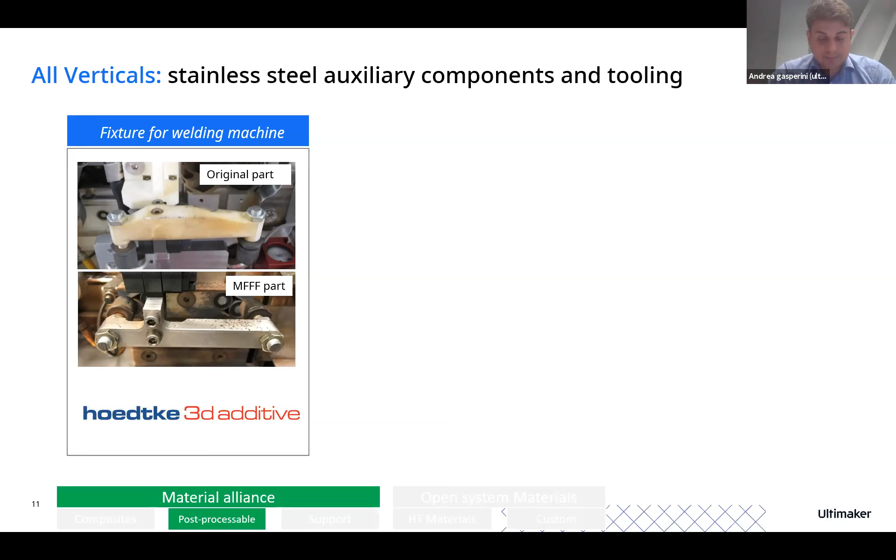Then the second part here is I want to talk to you about a new material that came out last year. It's basically the complementary support material for PVA. We know that PVA is a really good support material for thermoplastic material, but it has certain limitations. Therefore, Aquasys 120 is really...

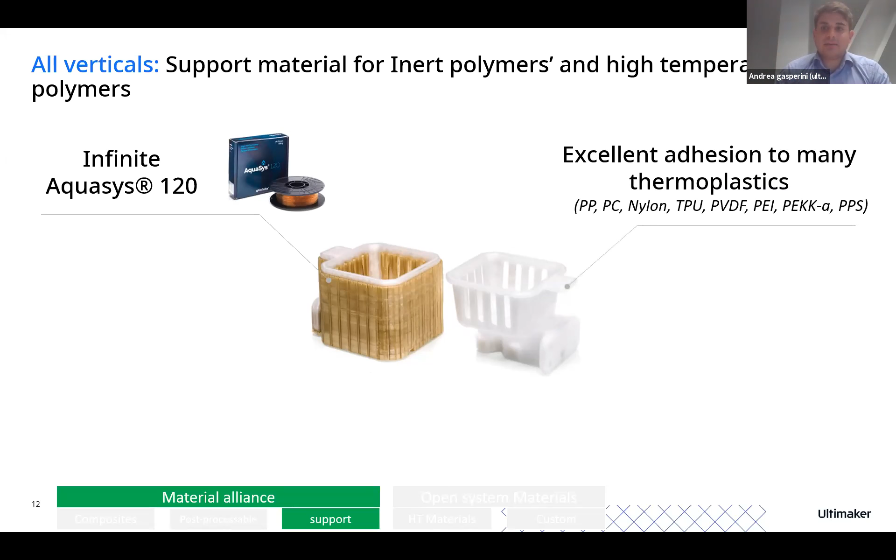...covering that limitation by being able to use this material as support for inert polymers. I'm talking about polyolefins, polycarbonate, PVDF, and all the high temperature polymers, because this material has a pretty good high temperature resistance. It has a pretty high storage modulus at high temperature, about 120 in a heated chamber, but also up to 220 when it comes to extrusion.

So to have contact with an extruded part, it's based on a new motif called the reinforcing microfiber technology that Infinite Material Solutions owns. It's also really easy to dissolve, in warm water around 50 to 70 degrees, without any need for a specific solvent or soap to be added. One key part is that, differently from PVA, it has really low moisture absorption, about 0.2 weight% maximum, compared to the 10 weight% that PVA would normally have.

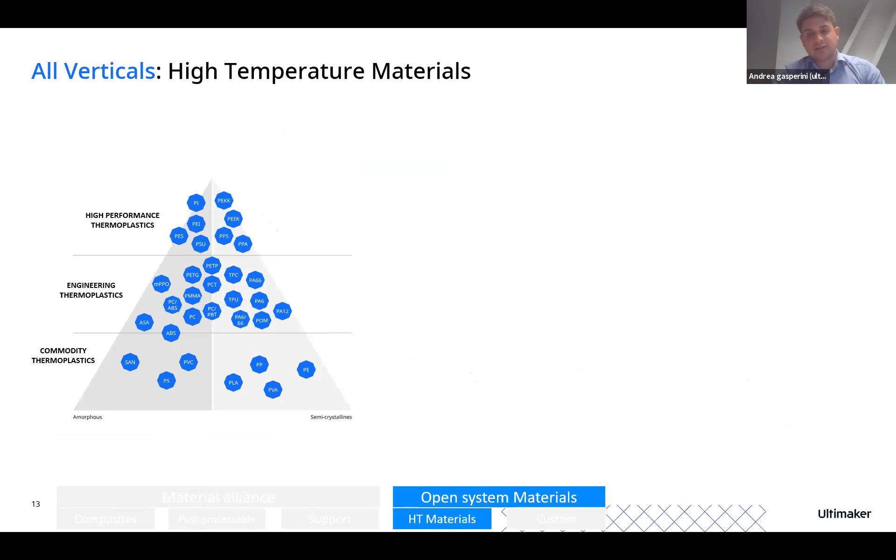Then I'm going to switch to the section on open material systems, and here I'm showing you something outside of the specification of Ultimaker for now. It means it's a material that can be used on an Ultimaker, but is outside of the specs. This is PPS carbon fiber. It prints extremely well, and it's part of the family of high temperature thermoplastics. We're talking about a material with a peak temperature resistance of 240 degrees for a short time, and a pretty good constant stability around 210-220 degrees for stable working operation.

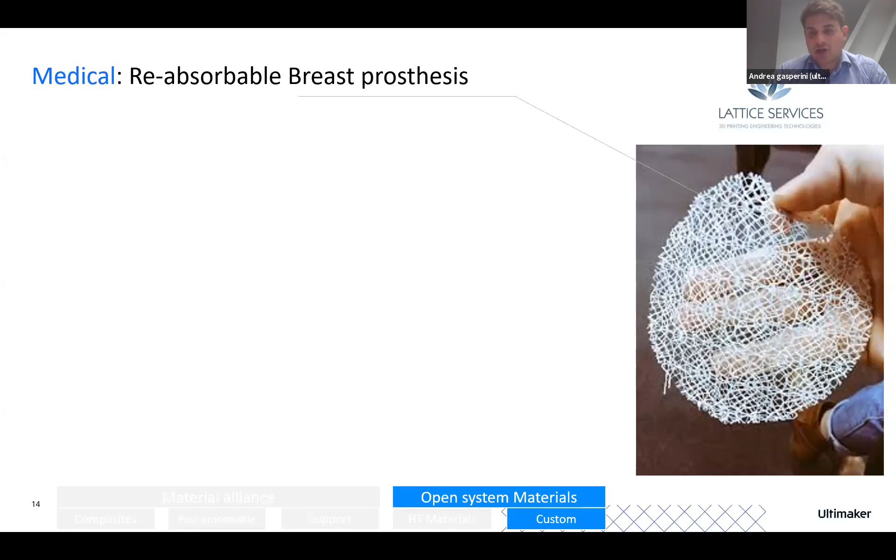You see a pretty thin, really complicated, and really biocompatible material. How do they do that? Actually, they make their own material, their own filaments that they use extensively for their facilities. So here we're talking about polylactic acid, glycolic acid, and also polycaprolactone. They're really biocompatible and also bioabsorbable by the body. They have developed their own print profile to be used on their print farm of S5 printers, which is really necessary as a low volume serial production tool for their personalized medicine mission.

So with this, we'd like to wrap up the benefits that the open material ecosystem is providing to customers. The first thing is openness. You can stay up to date with all the new developed materials, and you have the freedom to use the top materials available on the market with no restrictions. This really allows you to print fancy parts, complicated designs, and high-end materials.

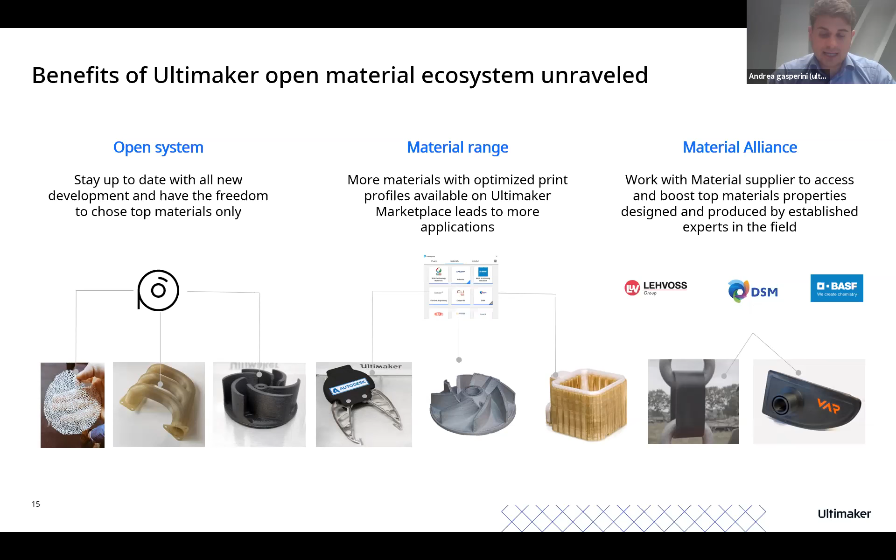The second part is having more materials on our marketplace with optimized print profiles, so you have an easy to use experience, and then more applications you can unlock. The other part is working closely with material partners, for OEMs like we are on the hardware side, this is really a must to boost the performance of material and bridge the gap with existing manufacturing technology, like CNC or even injection molding. The example of the hook and of the side pod is a really good example.

Before I start with my presentation, I would like to give you a short overview of our activities, of the 3D printing solutions from BASF. This company is a subsidiary of BASF, located in Heidelberg, and it was established already in September 2017.

We are now present here under the brand Forward AM, and we have superior material and solutions for additive manufacturing. Our team was about 150 people at the beginning of the year. I think at the moment it is already more than 200 after the acquisition of Sculpteo in France.

We have several application technology centers. Of course, one big part is in Heidelberg, but we are also active in Emmen in the Netherlands, where we have also our filament production. That's also the location where I'm usually located when I'm not sitting in the home office.

In general, Forward AM has experience, or is based on BASF, or is using the experience of BASF in product development. We have really good access to the R&D in BASF in Ludwigshafen. Due to these decades of experience, we have also access to several applications here in the industry, from normal or standard polymer engineering.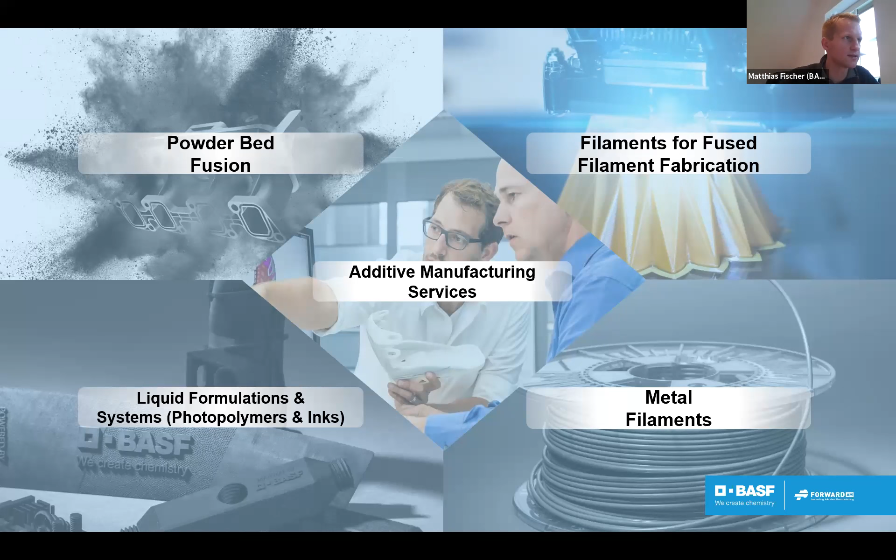At the moment, we have several Ultrafuse filaments in our portfolio, which can mean we have standard products like simple PLAs or also PET filaments, also sustainable products, where we have at the moment a recycled PET filament available.

We have several engineering filaments where we think that they are really very important to push this whole industry in the professional sector for several applications.

In the general world of plastics, there are so many different products available. We are not limited to BASF core materials, so we are also using other materials where we think that they are important to push the additive manufacturing industry in total, which can mean, for example, advanced PLA grades like our PLA Pro 1, but also other materials like PPs or ASA materials.

Optimized ABS grades for 3D printing with reduced warpage, for example, but also grades which are reinforced with fibers. I will explain later a few more details about that.

And we have also high temperature materials like a PEI 9085 and a PPSU, which require, of course, a little bit more, or which have more demands concerning the printer hardware.

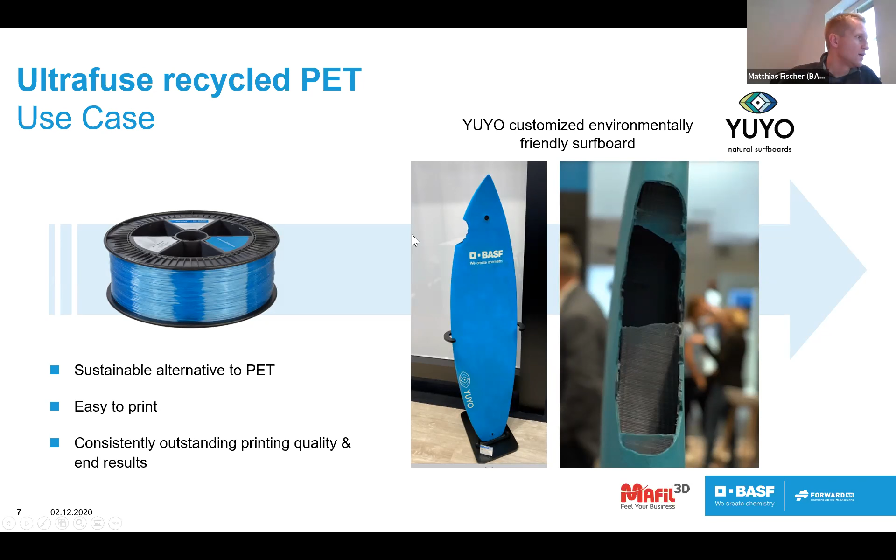Furthermore, we have more engineering grades in our portfolio, and I'd especially highlight the reinforced plastics, where we have several grades available. Talking about reinforced products in filament printing, we have several benefits like increased strength in the flat build orientation, very high stiffness since the Young's modulus is usually very high due to the fibers, and increased temperature stability - the heat deflection temperature, or HDT, increases whenever you add fibers to your product.

We also have lower shrinkage due to the fibers. A nice side effect is that the aesthetics usually also increase, because you get a nice black surface, slightly rough, which is nice to have - the layers are not as visible as usual in 3D printed parts.

Of course, fiber reinforcement also leads to several challenges - you get higher anisotropy in the part. These fibers are nice for the flat orientation, but there are definitely challenges in the upright orientation. Whenever you have the chance to heat the chamber of the printer, or close it with a cover to increase the build environment temperature, you can reduce this effect, but in general it's still there - one of the challenges to take into account when working with fiber reinforced products. Also, increased wear in the hardware is visible, so you should use hardened nozzles and make sure the printer has driving gears suitable for these abrasion-critical products.

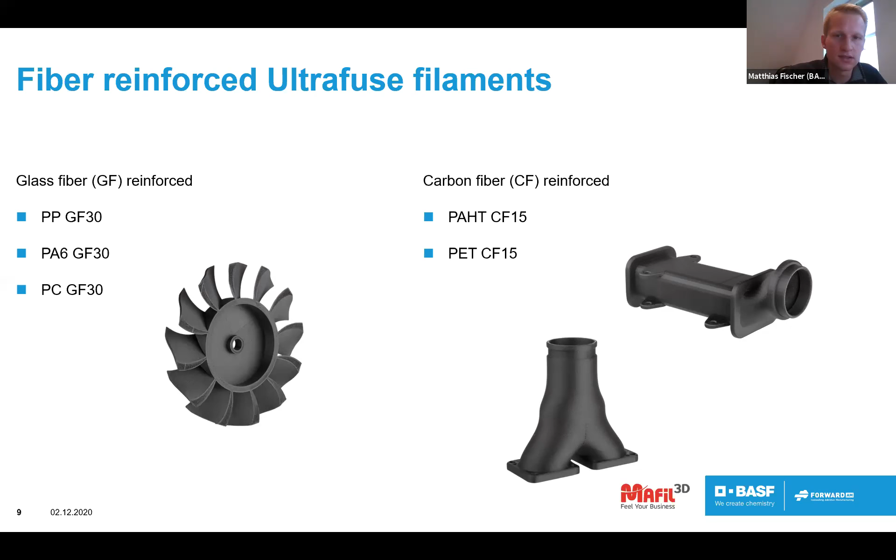When we come to high temperature materials, we have at the moment 2 products in our portfolio. It's a PEI 9085, maybe most of you know it as Ultem material, Ultem 9085. But we also have a PPSU grade in the portfolio, which is based on the BASF polysulfone product category. I will explain a few more details about these filaments later on.

In general, when we talk about high temperature products, we should first make the definition of temperature resistance. We usually do it with 2 methods: either the heat deflection temperature, which is a special measurement method to see how stiff a material is with an increase in temperature, or the so-called Vicat softening point according to ISO 306, which is based on a hardness test, but in our case that's not so common. We usually use the HDT value, which is also nice for engineers, because with this value we can already estimate how the stiffness of a part will drop at a certain temperature.

Now I would also like to give you a short overview about the metal filament. We got already some basic information here today, so I will just repeat it shortly. In general, the metal filament is a product which can be printed in almost all FFF desktop printers. We usually say whenever you can print ABS, you can also usually print the metal filament. Very easy to print, also safe in handling, so you have no powder. It's really a filament which is easy to handle.

You can print hollow structures like you know it from the FFF printing process in general. Afterwards you have a so-called green part, which means you have a polymer part with very high-filled metal powder inside. You can also post-process this part, like grinding, like polishing, already before you give it to the following debinding and sintering process.

Which is necessary to get really the metal properties afterwards. It can have also cost advantages to other methods. I would say it is not always competing with SLM, but especially for small parts it can be quite cheap.

It depends also a little bit if you have already an SLM system or not. Of course, if you already have a system in-house, it has not so nice advantages. But whenever you would think about buying an SLM system for a couple of €100,000, it's of course a very interesting alternative solution which can be used in-house for printing.

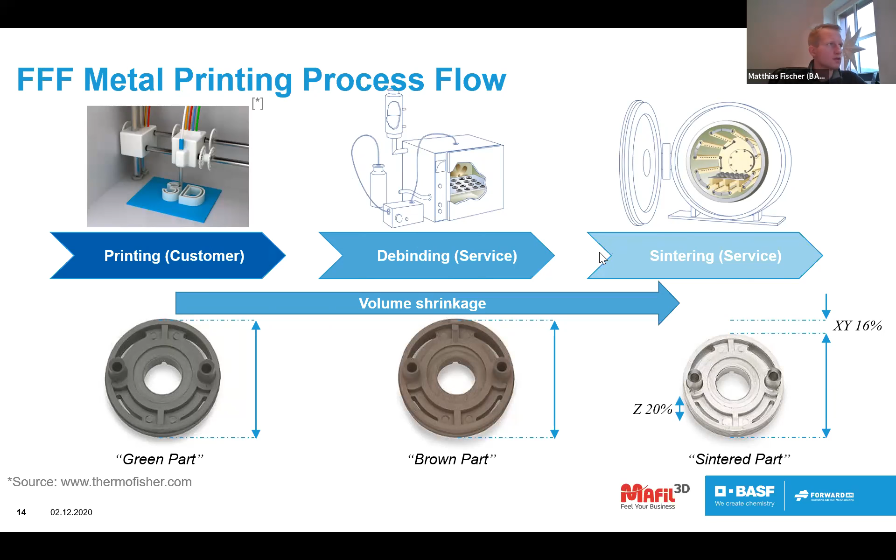After the sintering process, you have a final metal part. So here I'm also coming already to my last slide. When you have the metal part, you may have the question: what can I expect here? Which kind of mechanical properties can I expect?

And of course, we have also a difference between the flat and the upright build orientation. In the Z direction, we have the issue that we are limited by the anisotropic behavior of the filament printing process, but in general you still have a tensile strength which is at least almost in the area of the XY direction, though the elongation at break is much lower. But we are talking here about tensile strength of about 500 megapascal.

Which can definitely compete with the MIM process, but also with parts which are printed in the SLM process. Of course, it depends always on the porosity of the part, on your print settings, also on the post-treatment, like polishing for example. But in general you can expect parts which are really quite comparable concerning the mechanical properties.

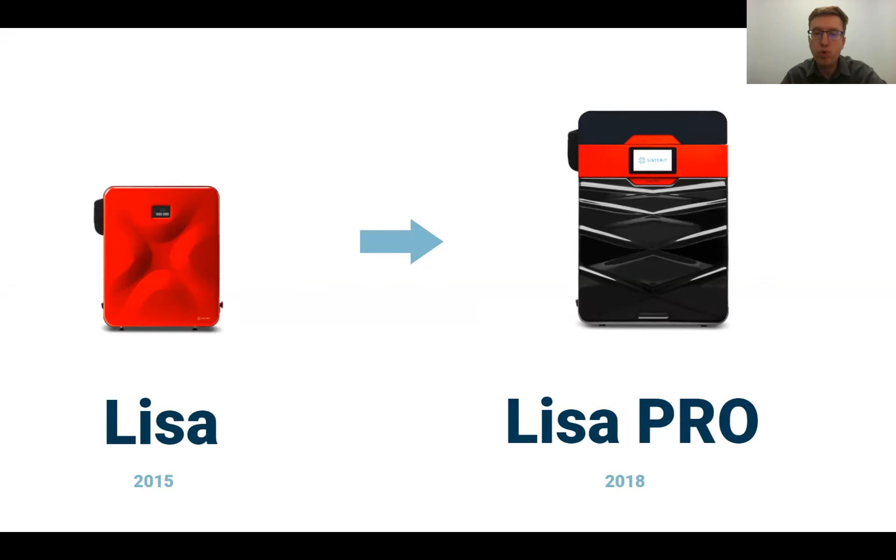I would like to tell you a little bit more about Sinterit, because we are a company that started a real push on desktop laser sintering machines. We started that with a Lisa machine shown to the market in 2015. This was the first easy-to-use small machine that you could just buy and use for laser sintering parts. Then two years ago we introduced a new machine called Lisa Pro, which enables using even more materials in the system because of a built-in nitrogen chamber. As a result, this created a really good opportunity to grow a base for new materials.

But in general, the whole thing about laser sintering is not just to have printers, but to provide the whole complete solution—the whole ecosystem to run it, to make it easy and affordable so that every business can use it.

And this is our goal as a company. There will be some more to that, but I will mention that at the end of the presentation.

Today I'd like to talk with you about materials in SLS in general. Essentially in SLS, you use powder to sinter with a laser to achieve the final part. But that means the powder material needs to have some unique properties to properly flow and properly melt to enable really good printouts. It's not easy to make a powder that's great, and that's why there aren't so many powders yet on the market. But there is a way to change that.

I think most of you saw SLS parts, the white parts, and it's more than 90% sure that it was just PA12 parts, because this is the standard for SLS printouts till today. The usual material for that is PA12 - it's been the standard for SLS for 25 years now.

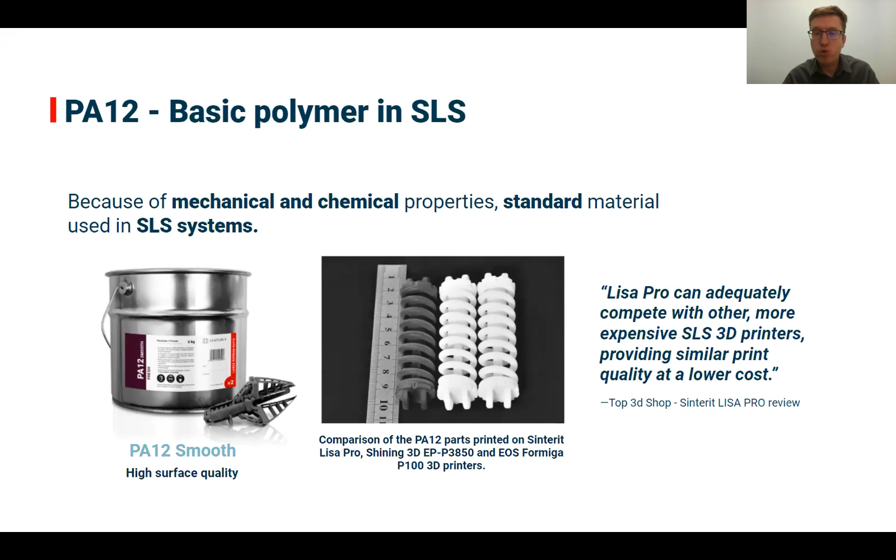But we decided that we need to go further and introduce even more materials. So we also decided to introduce a more mechanically capable PA11. This material is great mechanically, with high elongation at 55%, but also with tremendous impact strength. So you can really easily make casing for tools that will survive real heavy-duty work.

But then there are the rubbers. Essentially, rubbers are not so easy to process with FDM printers, but with SLS and the freedom of lack of support structures, it enables even more applications that are possible with rubbers. That's why we introduced a TPU material called FlexaGray, just for prototyping of rubber parts. This was the basic starting point for working with rubbers.

But there's a lot of different rubbers that could be used. So then we decided that we should dig into that, as there's way more things that we can make with rubbers. And that's why we got a really soft touch TPU material with a shore hardness of 45 Shore A scale, which is great for really haptic devices, anything that your customer would like to touch or you would like to provide in your product. So this is the uniqueness of the material that we introduced.

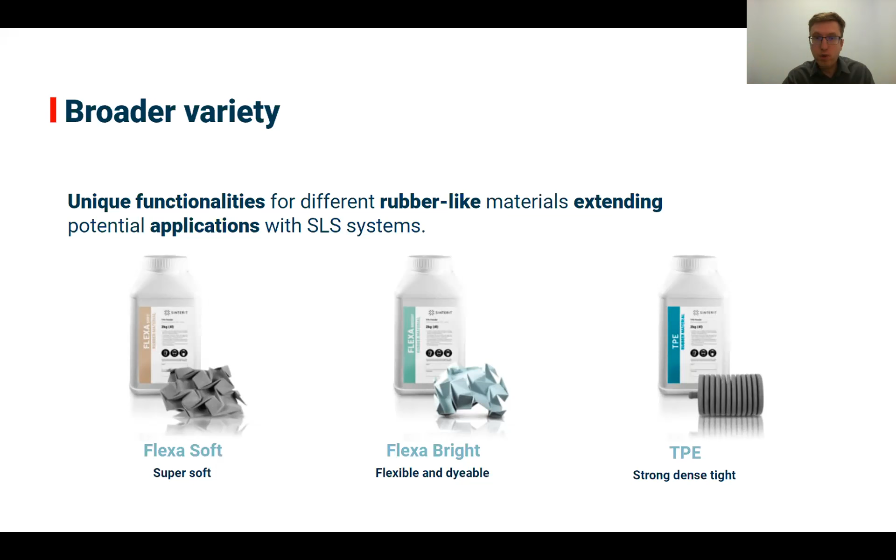But we haven't stopped there. Just a week ago, we launched a 7th material into our offer, and this material is PA11 ESD. With this material, we decided to bring even more functionality into the materials. It's safe from electrostatic discharge, with way better thermal properties, even HDT at 170 degrees. It's also PA11, based on castor oil, so this adds a little bit more eco-friendliness to AM here.

And this material we introduced with the electronics industry in mind. We see this material in FDM printers, but also in SLS we can get even better results with it and deliver a solution for final assembly lines, tooling, and different other applications there. Beside that, there's additional demand in explosive atmospheres where this kind of material is really needed.

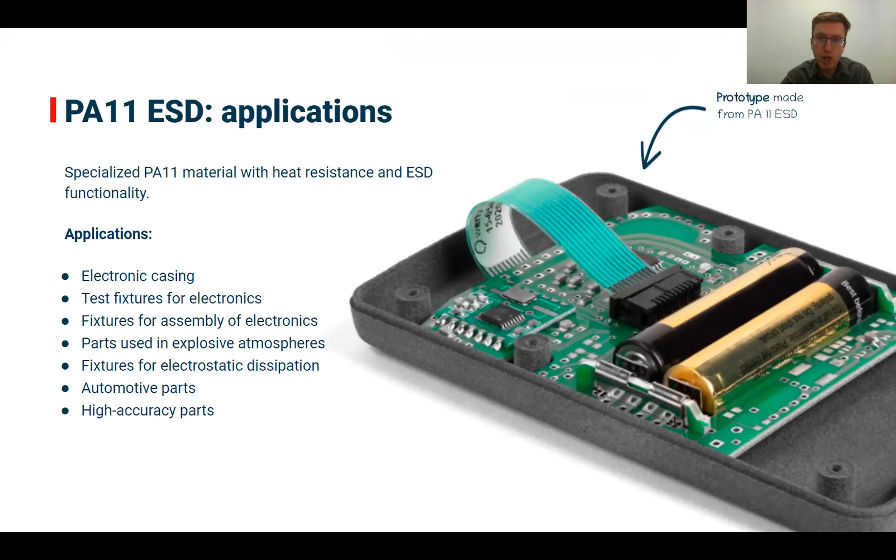Right now we have 7 materials in our offer, but we believe that's not all. We believe there is also always a way to have third-party materials, other than what we see right now. That's why we believe in the openness of the system. I think we are the easiest to start and really open SLS solution, where you can use whatever other material you want. This is our principle as a company, that we think it will grow the market.

What does it mean for you as a business? It means you don't need to only rely on our materials. There are other alternative suppliers for materials. We see this as a growing industry right now. We, of course, get the best material into our offer and offer that directly, but we cannot stop anyone from ordering PA12 from another supplier.

We believe that's an option we should enable. There are other types of materials that for now are niche, but if you want to source them from other suppliers, you can go freely and get it. Of course, we are constantly in touch with customers, and if something is really worth it, we also help them, and in some cases we bring that into our offer later on. But it's utilized not only by business but also by research institutes. We saw a lot of work around different additive tests that could be performed pretty easily with the system.

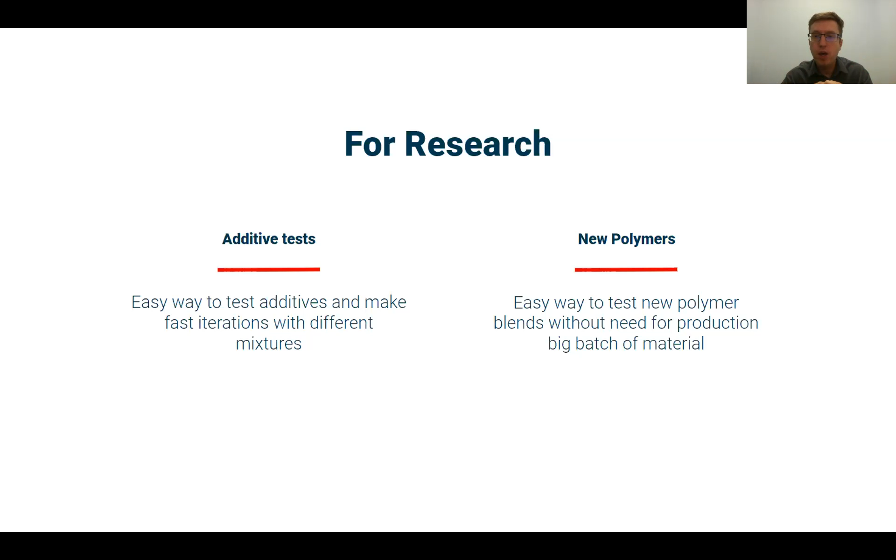For making new powders, new polymers, this kind of openness and the small machines for desktop laser sintering we provide enables fast iteration with the need of really tiny amounts of powder. You can start with as little as 500 grams of powder to do a real test on the final system, which is really unique for SLS as a whole. We see a lot of universities, hundreds of them, utilizing our machines for teaching and exploring new materials and new additives.

In the end, right now we are seeing more and more new powders coming out from universities that we believe can show up on the market and get commercialized in the next years. This is essentially what we believe this work represents: with openness, we can really broaden the spectrum of powders, as for example with Ultimaker, there's a broad portfolio of materials you can select. With a really close relationship with research and customers and their applications, we can really boost that up.

So essentially, to summarize: we know that PA12 is mostly used right now, but we believe not all necessary materials in SLS exist yet, and this needs to grow. Right now we deliver the most materials in desktop laser sintering solutions, and they are ready to use. As we believe in openness, we see that in the future there will be way more materials, and in the following 3-4 years from now, there will be dozens of materials to select. Right now we have about 5 materials in the pipeline and many more in future research plans.

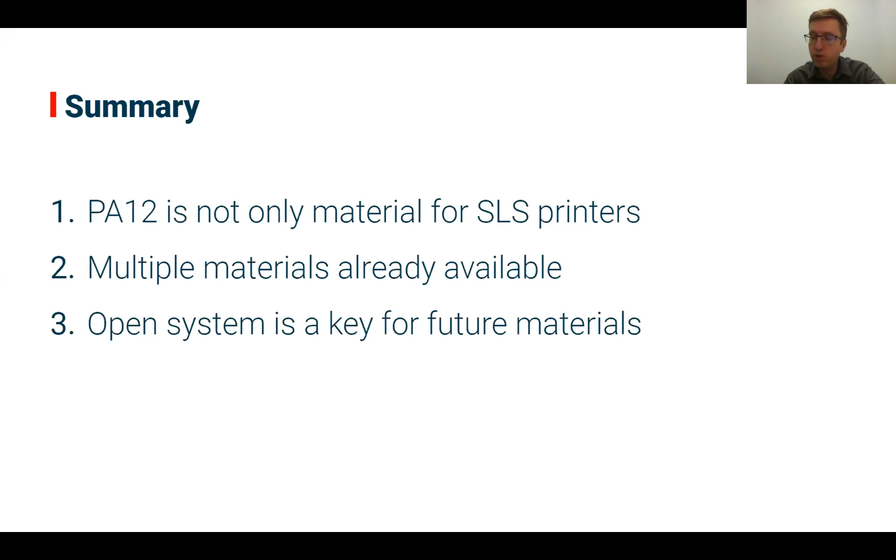Before I finish, I'd like to let you know that beside the current situation in the world, we are working continuously to extend our offer. Tomorrow we'll be launching a new product from Sinterit. You can register for a webinar to see more detail about it. I can't share the details yet, but it will be really useful for all of you, especially if you haven't worked with powder yet, or if you work with big industrial SLS machines. I'd recommend going to see how it really works with desktop SLS solutions.